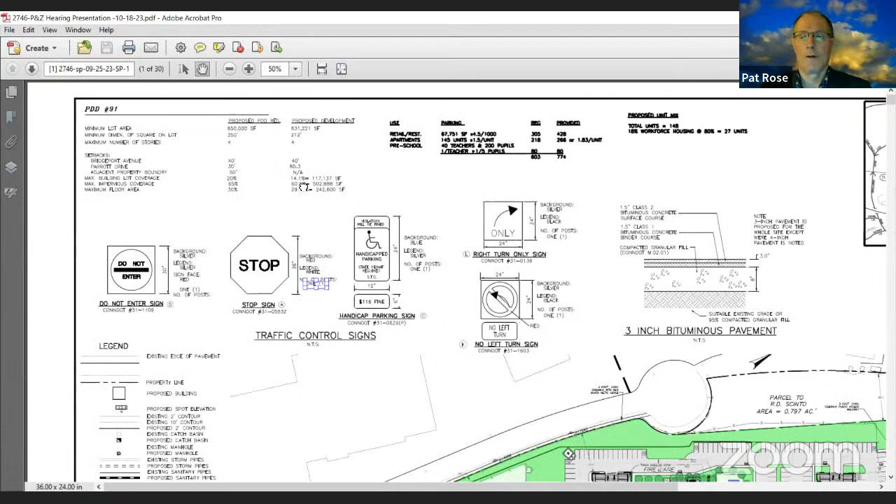So, in taking comments that were given at the initial public hearing, we've made several changes to the site plan. First of which, you can see that the pedestrian access has been retained and the vehicular access has been removed between Enterprise 3 and our site. So now we have parking that goes all the way across and closes that off. The other major change is that there is parking underneath the building, and there are 4 stories of apartments above that parking level.

So we still have the building broken up into 3 pieces. This side, which is A, has 41 parking spaces in it. The side that's B on the other side, which has parking, has 49 spaces. And in each one of these garage areas, there is a trash room adjacent to the elevator. So people would bring their garbage down, put it in the trash room, and then staff would bring it out to the dumpster locations in order for the trash to be picked up.

Fairly straightforward. What we've done as part of this with the building is we've dropped the lobby, and common spaces are still on the ground floor, so that this breaks the 2 buildings apart. You have access from this ground floor to the pool, to our amenity space in the back, where we have some grills, picnic tables, fire pit, and seating, and then it's a grassed area around. Mr. Rose, what did you say was still on the first floor? The lobby and what? The lobby and common spaces, which I'll show on the floor plan. Okay.

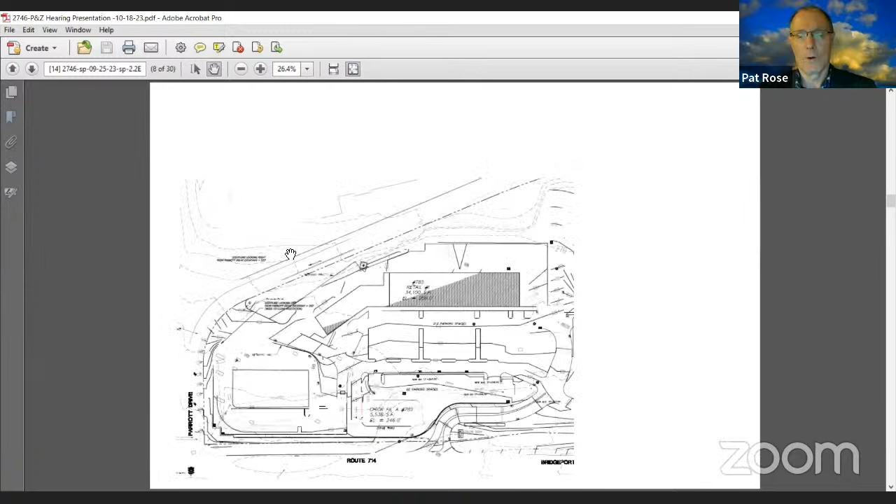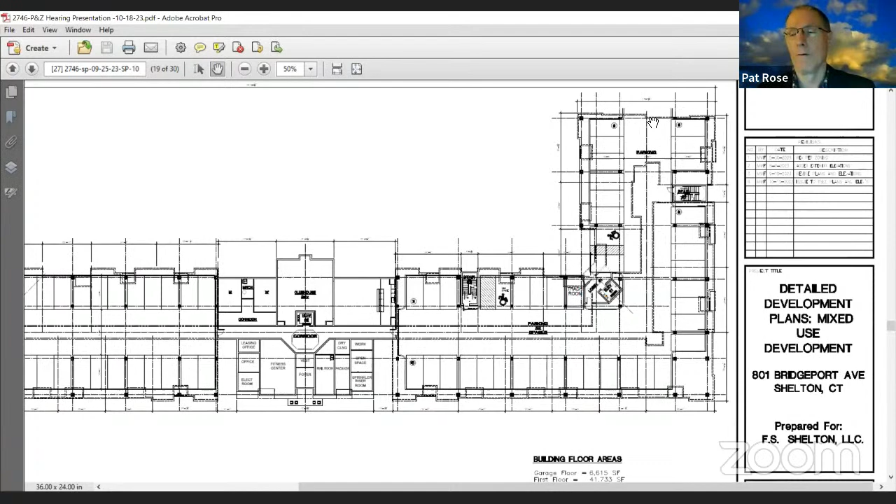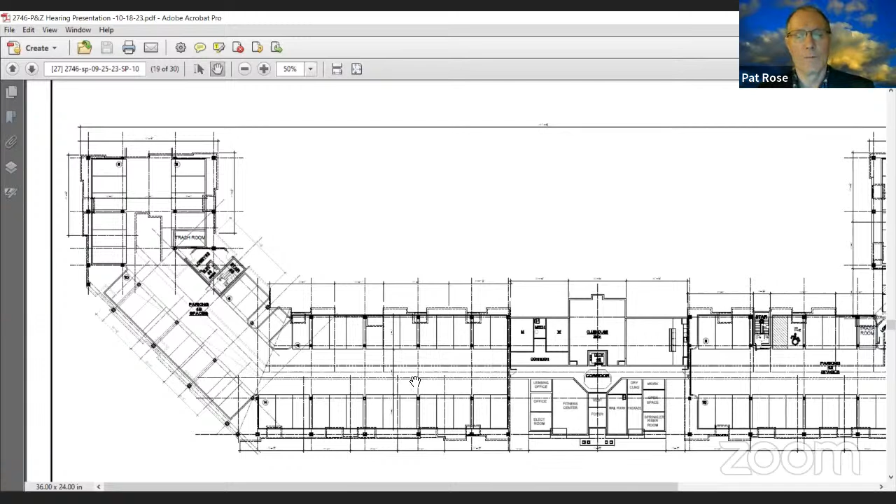We've got an L-shaped parking area here under building A, elevator here, stairway here, and your trash room. So when you enter, if you were to be parking outside, you could walk in, and on the left and right side of that common area is the street level, so to speak, parking spaces. Correct. Okay. All right. So you're entering both of these wings at the rear of the building, and they are dead ends, and there would be assigned parking in there, and you come back out. Again, we have elevator, stairway, and the trash room in this little knuckle here of this V-shaped section.

We have a unit count on this plan, which talks about 148 units, which I'll explain where those extra 3 come from. And 148 units, and I believe with the 18%, we come out to 27 affordable units. The breakdown of that 148 units, it would be 60 one-bedroom units, 17 one-bedroom plus office units, so that's really 77 one-bedrooms, and then 71 two-bedroom units. So it's almost 50-50. It's a 45-55 split.

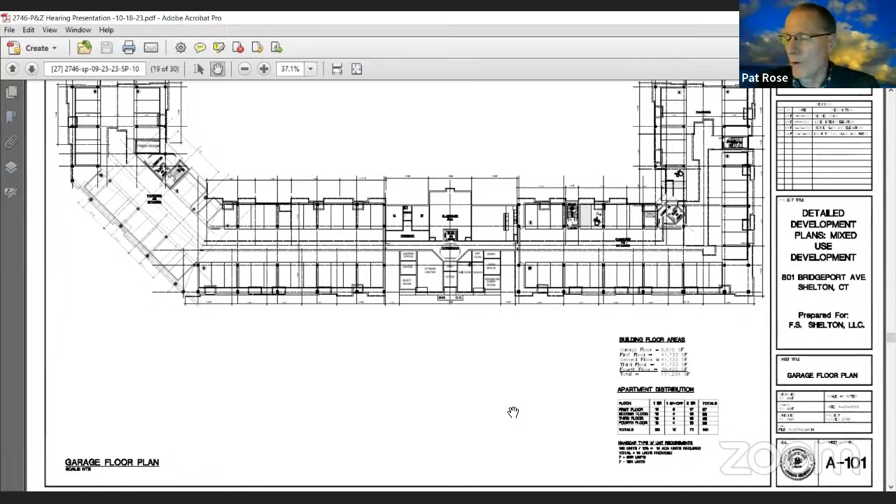And the unit sizes that we had talked about previously have not changed. The one bedrooms are from 700 square feet to 850, and the two bedrooms range from 950 to 1280 square feet. The typical floor plan. This is the first floor. Has 2-bedroom units interspersed along here, and then there are 1-bedroom units interspersed.

The only place that we lose a unit on this first floor, we end up with 37 units, is because this club area is 2 stories. And in this, because we've had this common space area on the first floor, we've had to add an elevator for that common space. So it is separate so that you can access that common space from either wing of the building without having to go into the garage. Same thing for here, 2-bedroom units, and then 1-bedroom units across the front.

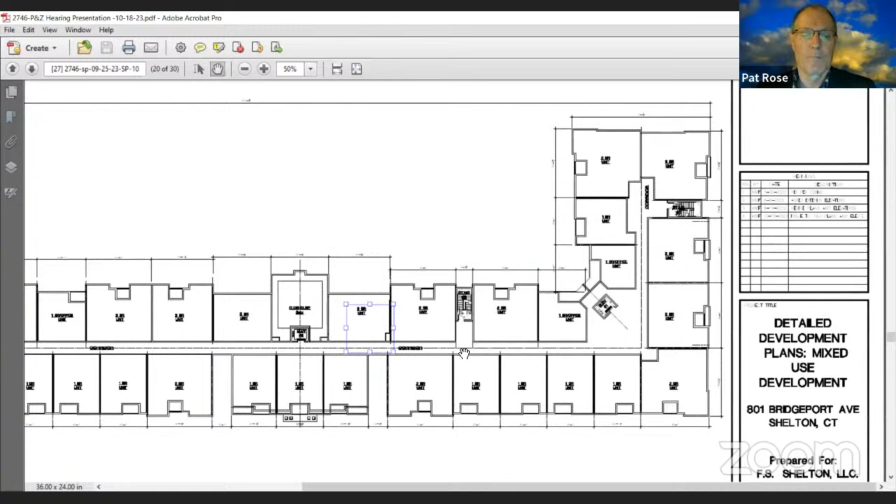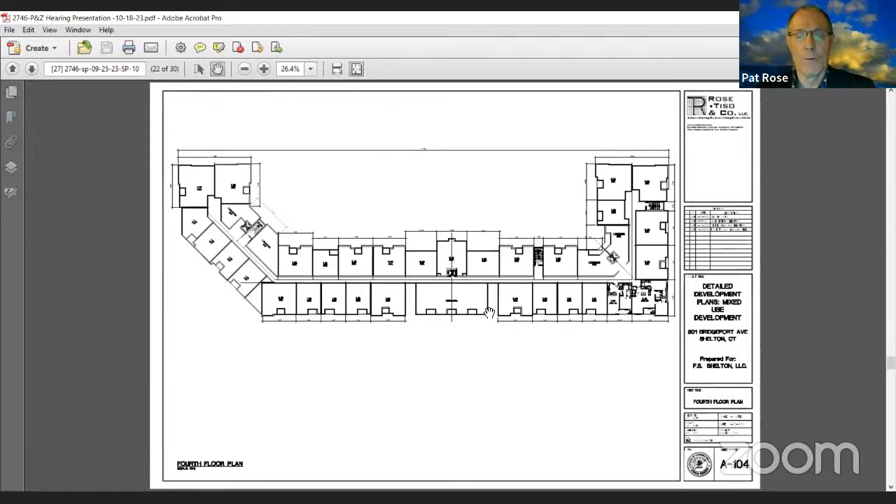The typical second and third floors are the same as the first, except there is a unit in the center where this elevator is. And then on the next floor, which is the fourth, we have removed any units off of the front of this and created a deck. Going to be a roof deck on this fourth floor, which is accessible by this corridor. And we did that and maintained 3 units on the fourth floor in the back so that we could have access from one side of the building to the other side without breaking the building.

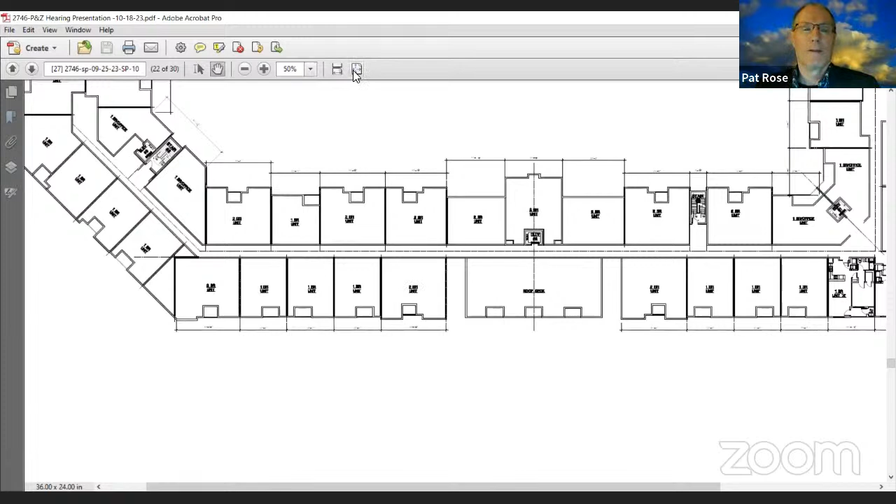The elevations are somewhat similar, but I believe that we posted the renderings. I don't know if everybody has seen them. I will use those because it's a lot easier to describe what's going on than flat elevations. So this first rendering shows a bird's eye view that shows the access drive coming up to the platform where the residential is, and you turn and the front entrance is here. This is a 4-story section right here. These are 5-story pieces on the other side. So there's a break in the building.

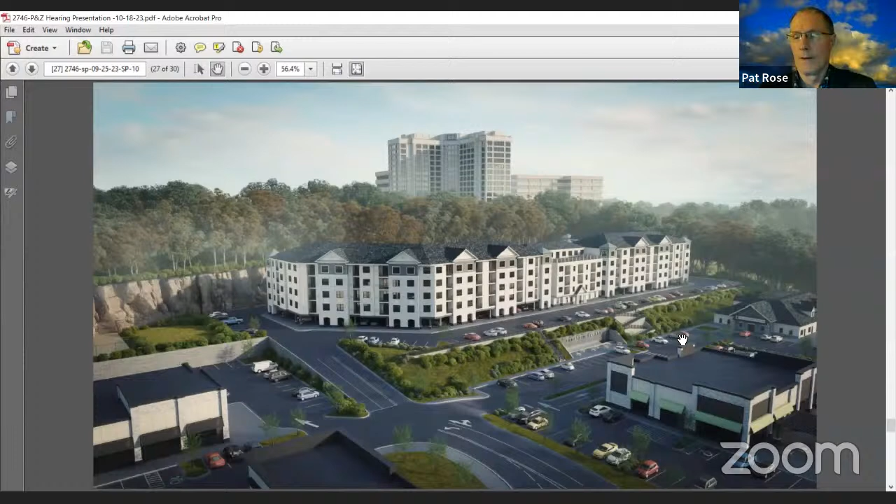We're continuing to do towers that are reinforcing the corners of the building and the gables that move along. So then you go all the way around the building and come back around this side. The dog park's over here. There's a grass area on the side of that. You can see where Panera is. This is where the fountain is at the bottom here, the lower level that squirts up, and the main fountain square here. And there's some seating outside of that. And the main retail building is over here. And Goddard School is over in this corner.

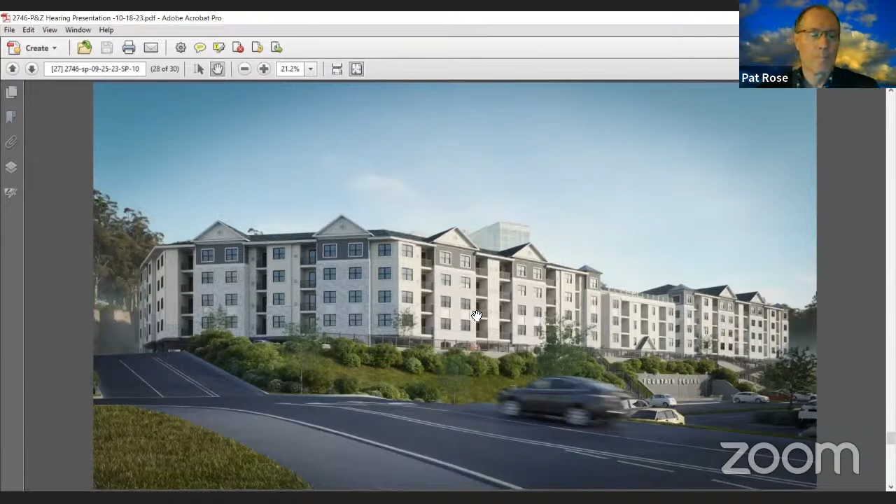So as we drive up that road, this is what we see. You can actually see the residential building and corporate park behind it. You see the 4-story with the roof deck here, and the other higher 5-story buildings. You can get a better view of the fountain down here, the fountain squirting up and some seating. Get a better view of the materials that we're using. What we've done is we've reinforced and brought these towers to the ground at the garage area, all brick, up to the top fourth floor where these are shakes, and then the gable above.

And again, we use brick on the lower levels, and then siding on the upper levels. Tried to use the same brick that we've used in the buildings that are on site. Use a light color siding to emulate the EIFS that's being used on site, and then a darker color for the shakes, which is used in the Panera building. So it's interspersed on the site. And then we're using black windows, same as the retail buildings, which all have black window frames. So we've incorporated the materials that are being used. And one other thing, at the bottom of these columns and towers, we are using the same black granite that's used on the lower piece of the retail building.

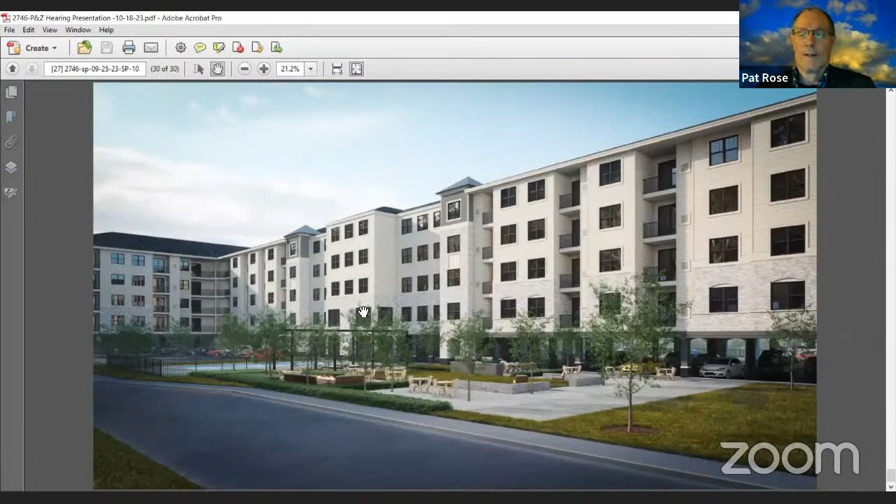A view of the rear courtyard, where you can see the common spaces in this location. Pool being here, seating areas, and then there's grill stations, and then there's a fire pit in this corner, and then grassed area on that side, interspersed in that courtyard. There's a nice space behind that.

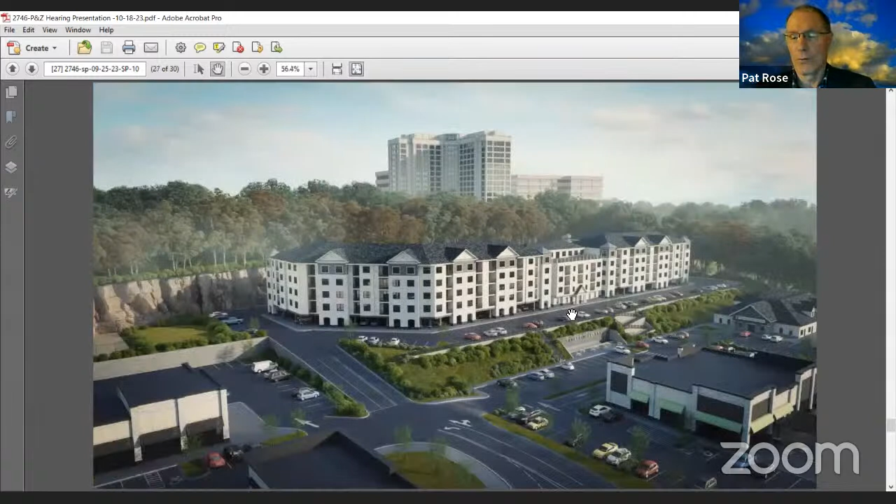That's it for the architecture. I invite Manny if he wants to go through any of the site drawings. I can stop sharing if you need me to, Manny. Yeah, that'd be great. This is Manny Silva from Rose Tiso Company. I'm the civil engineer on the project. I'm just going to pretty much go over some things that were changed during our last go-through.

One of the things, as Pat was detailing, is that we have put all the parking under the building. That's the main thing here. So you have your entrance, you're coming up from Bridgeport Avenue. You're going to circulate. There's 49 spaces under this wing here, and then 41 spaces here where you come in from the north wing here.

We also added a sidewalk, which instead of being a vehicle and pedestrian access, as Attorney Thomas stated, is now just a pedestrian access to the corporate towers. And that will continue to be here in this corner. We were also asked to extend the sidewalk along Parrott Drive and then add a new fence. Now this fence is going to be a black metal picket fence, similar to what we're using on the site.

So it'll be a decorative metal fence along this sidewalk here, and that will actually connect the Renaissance Tower area here and then these industrial areas to the west of us down the sidewalk on Parrott Drive and then into the property that way.

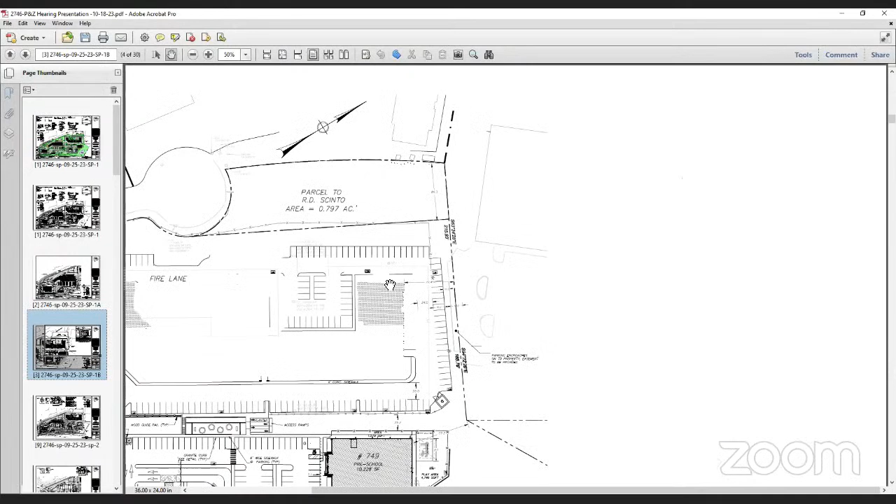Okay. So as in the rendering, there's a dog park here, and then there's going to be a grass area in this area here. I've also added a little more detail on the amenity space behind the apartment building. If you go to SP1B, I have an inset here where you can see we have some stone patios here and here, and a seat wall around a natural turf area with a fire pit area here, so people can sit around. It's going to be a gas fire pit. And then we have 2 areas here for picnics outside, and then 2 grills.

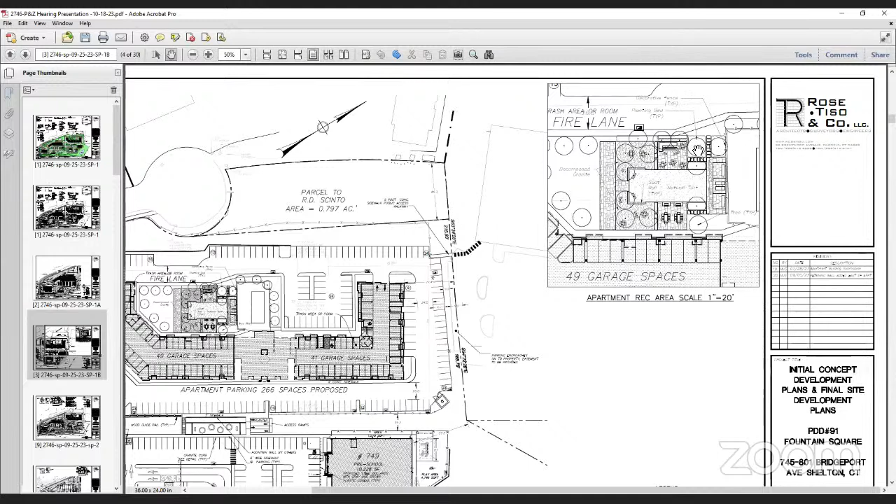It'll be landscaped. You could see that in the rendering. The renderer did a good job of showing what this space is going to be in 3 dimensions. I think that's most of the changes. Oh, and then we had this fountain, which now is going to be a pool at the bottom with upward jets, similar to what's at the entrance here. And then that back wall will say Fountain Square, and we'll have some tables and seating in front of that water feature.

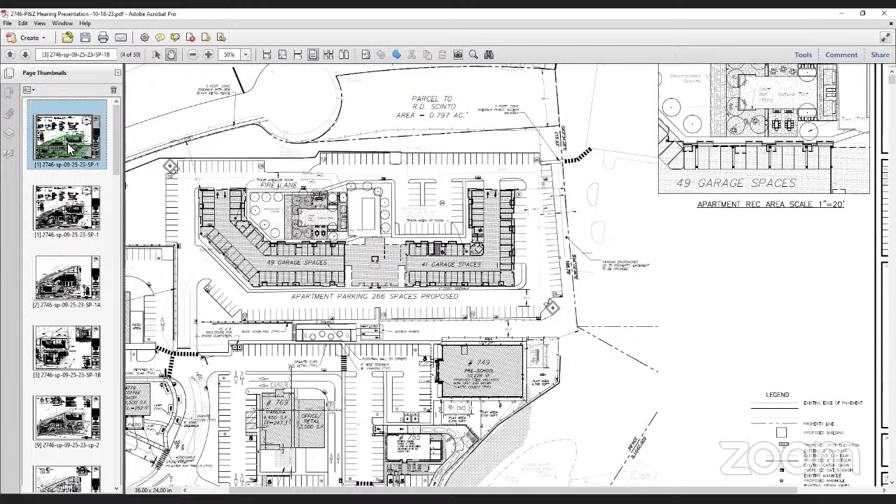And then as in the rendering, you saw that switchback stair here, and then that stair down here to connect the 2 plateaus, the residential plateau up top and the lower one below. So if there's any questions, I wouldn't mind answering them. Are there any questions from the commission? Commissioner Amato does. Sure.

The fence along Parrott Drive was at one point described as black chain link, and you're saying that it's going to be a picket fence, which sounds better to me. Correct. So there's currently a chain link fence. It's very run down. It's actually falling over in some sections up here on top of Parrott Drive.

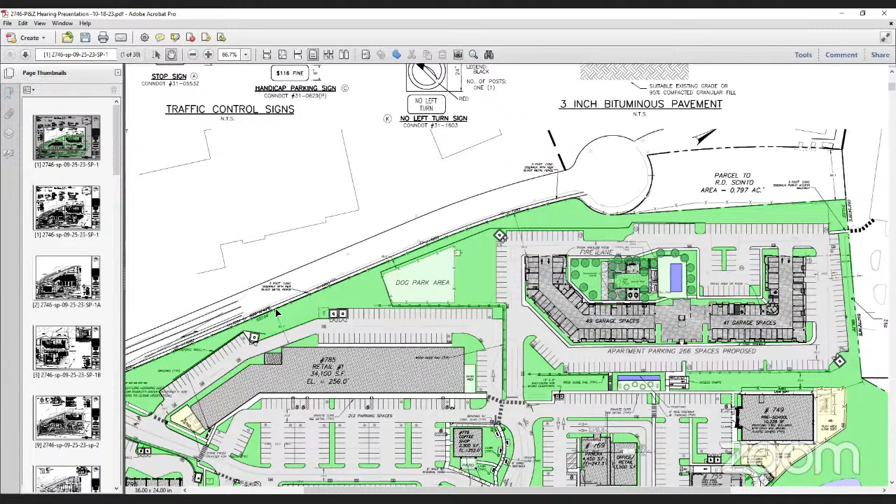And we'll replace that with, you can see that in the rendering too, a black metal fence that has black pickets. It's not going to be a solid privacy fence or anything like that. You can still see through it. Is that similar to the one that's along the driveway and on top of the fountain? Correct. We're going to use similar fencing throughout the whole project.

Any other commissioners have any questions? Around the dog park, you have a significant cut and graded area for the dog park area, which I think, if I'm reading your contours right, is substantially lower now than Parrott Drive. Correct. So on Parrott Drive, what are we doing for vehicular protection, on top or below, in that area where the drop off is so close to the road?

So this here will have fence on top, a sidewalk, and then there's the curbing from Parrott Drive. There's still, I'd say, I can measure it, but there's still a good amount of rock face here that's there today. Then from here below is a retaining wall. And then the park itself is fenced off. We have a fence on top of this grade here, which is going to be the metal picket fence.

I'm more concerned with the safety of the vehicles. I mean, if you think that you need an additional guardrail up here or something, but I suspect you do. That dog park area was not there when it was a UI facility, was it? That was created, correct. Before you had a significant green area, so even though there was a drop off, it wasn't a precipitous drop. But now you've created a precipitous drop of 25, 30 feet.

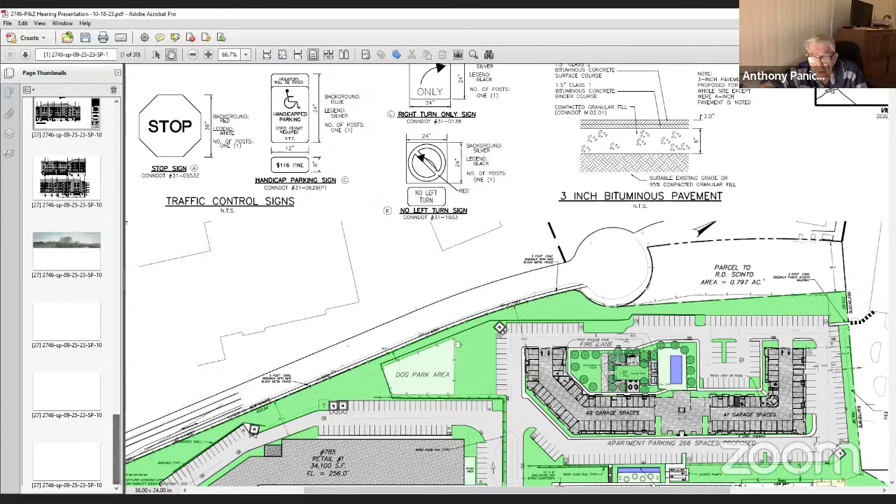Yeah, but I think there's enough offset in horizontal separation. As you can see in that rendering, there's going to be like 15, 20 feet of ledge up here on top where there'd be a fence on the other side of this. And then there's a sidewalk and then there's the road.

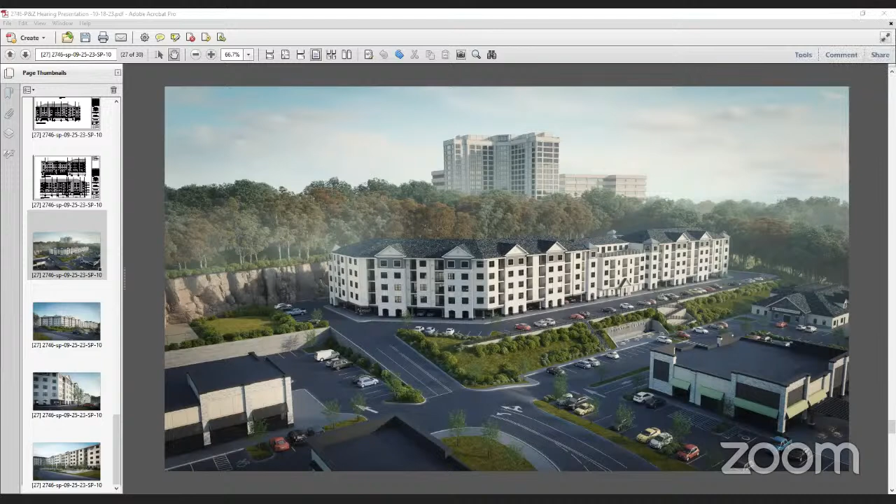I'm just concerned about the proximity of the face of the rock cut to the travelway of Parrott Drive. If a vehicle, for whatever reason, loses control and goes through that little fence, what's to stop it from going over the edge? Right. If that's a concern, we can definitely put a guardrail at the base of the fence outside of it. Somewhere, somehow, at least in that particular area. I don't know about the rest of it because it's very difficult. You've represented that the contours are not the true contours of what's there now, so it's hard to come up with any problem.

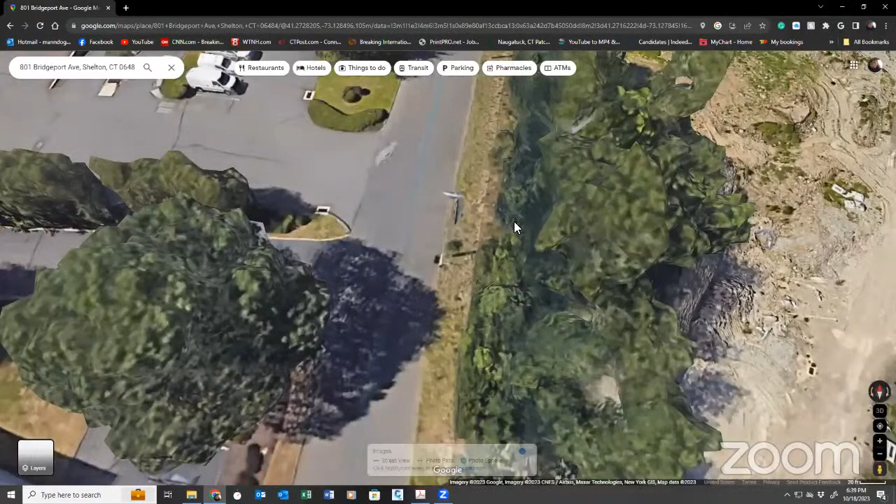Right. So you can see here from the aerial, this is the area that you're speaking of. Right now this is the existing fence with the barbed wire up on top. We're going to replace that with a metal fence, and then there's going to be a sidewalk here. And basically what you see in this picture, just on the other side of this brush is where that drop off happens. So they would have to go over this curb, over the sidewalk, through a fence, and these trees are going to be up here. And then that's when they would fall off the edge.

But if you'd like, as you can see a fence here, this will be replaced by a decorative metal fence. We can have a galvanized guardrail or a wood guardrail here at the base of it, if need be. Yeah, this is Attorney Tom, that's something that would be discussed with the traffic authority. This is a town road. So if the traffic authority and the city engineer feel it's necessary. It's been that way with a rickety old fence for a number of years, and there was still a drop off.

It didn't have that precipitous drop off before. It had a pretty good drop off. If someone went through that fence, they were going to go a short distance, maybe a little longer distance, and drop off. But whatever the traffic authority and the city engineer wants, we'll accommodate them.

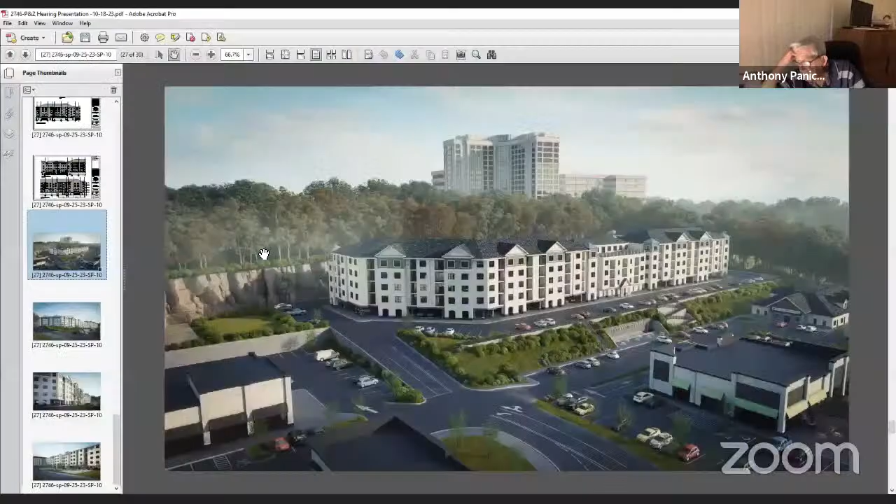Okay, any other questions from the commission or Mr. Panico? Yeah, I've got a couple. Go right ahead. Could Pat address the building heights?

Because the building is pushing height, 70 feet now, it looks like. We are at 68 feet to the very tippity top of the peaked roof. Right. At the UI building, it's 56 feet. Right, but our zoning always recognizes height to the highest feature. So we're dealing with 68 feet on the two wings, correct, 68 feet to the peak and the ridge. 61 feet or so on the middle part.

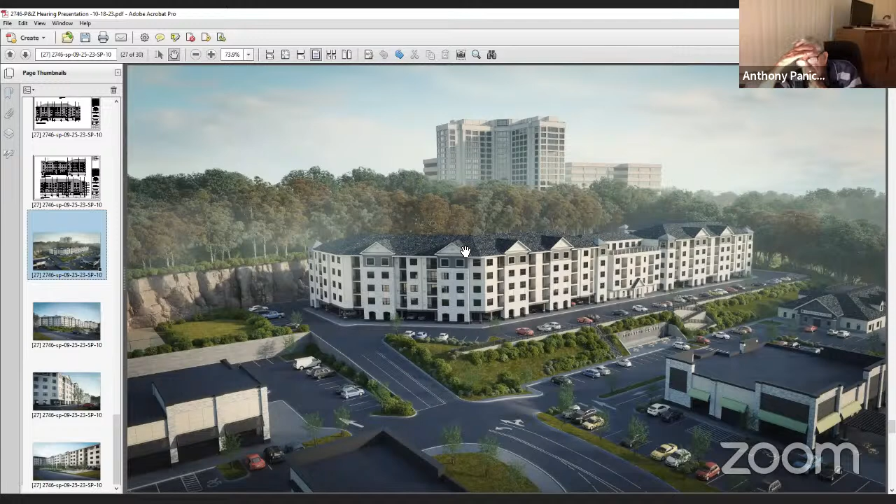If you did an average of those two, the middle between the 56 and the 68, you're at 62. Okay. Okay. And my other concern is the one I expressed early on in the whole public hearing process, is that you've got a building that's 500 feet long. And I don't think the modifications have taken that edge off of it. But

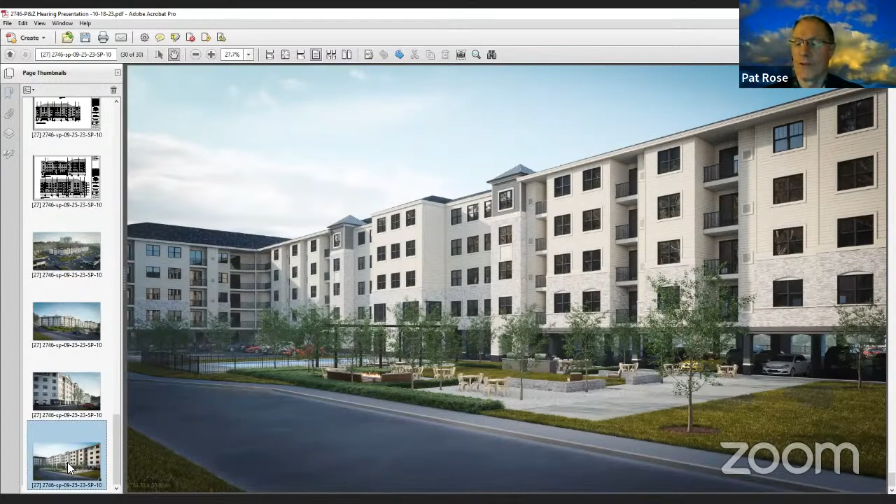Well, I believe that there certainly is a distinct drop, especially in that front elevation between the 4-story and 5-story building. You can't see the rear portion of it from anywhere unless you're in a helicopter. Well, I think you have the rear elevation, didn't you? Correct. The rear elevation you'll see, and the reason I've kept those 3 apartments up there is to be able to connect from one side to the other on that 4th floor.

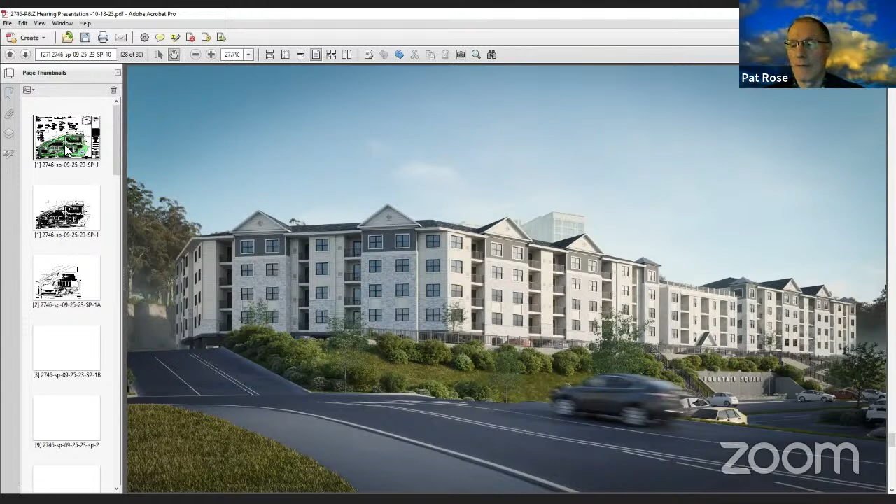And then my other question architecturally was, if I understood you right, you're going to collect the rubbish at the garage level and then move the rubbish over to the dumpsters? That's correct. Why not just pick up the rubbish at the garage level, so you don't need to have this outside rubbish? It is a possibility. We've got to go over that with the local carting people to make sure that we've got the height to do that, because that has some constraints inside the building. Mm-hmm.

Dominic, I didn't take the time to go look at the existing statement of uses. Are we okay on the height, or does that have to be modified? I would have to take a look at it. I don't have it. If you give me a minute, I can access it. That's all right. Just as long as you're aware of it. Yeah, we could certainly adjust it accordingly.

And also with respect to the height, I know it's big, but it has a view of a lot of stuff that stretches above it, being the Renaissance and the corporate towers. As you're looking up, it does take away from it because you're looking at buildings that go above it. Even from inside, but even from down at Bridgeport Avenue. That's different. But, yeah, I'm just saying.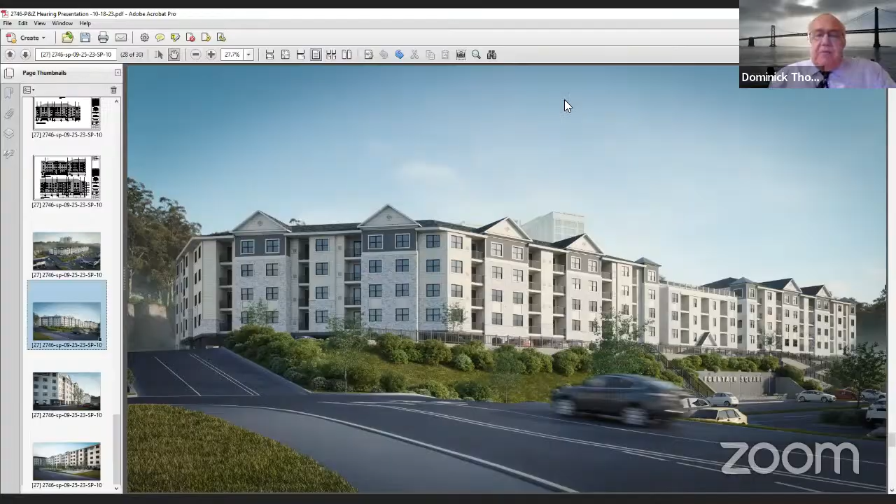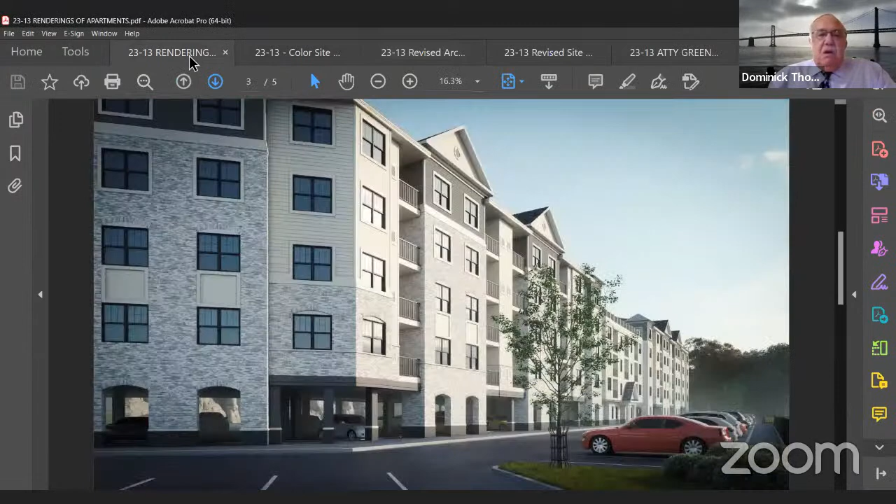It's different. If this were approved, whatever the name of this complex is going to be, are they going to be looking to identify themselves on the fountain? I'm sorry, you mean on the fountain down below? Yeah. Yes, as a matter of fact, if I can give you even a better, Pat, or Manny, stop screen sharing and let me pull something up. So here's a cropped version of the fountain. Is this what you're talking about, Tony? Yes. Are the apartments going to be called Fountain Square Apartments? I would assume so, but Dave Gunier is there. He may be able to answer it. I would assume they would be called Fountain Square Apartments.

Okay, my concern is I don't think it would be desirable to have any kind of identification of that sort on the fountain. The fountain is the fountain. It's the fountain for the whole complex. Right. It shouldn't be a basis for signage other than Fountain Square, of course. Oh, okay, we thought this looked nice. Well, it does look nice. I'm just saying, it shouldn't get messed up with. You shouldn't have another apartment name underneath that. Exactly. Oh, no, I'm sorry, I misunderstood you. No, the apartments are Fountain Square Apartments.

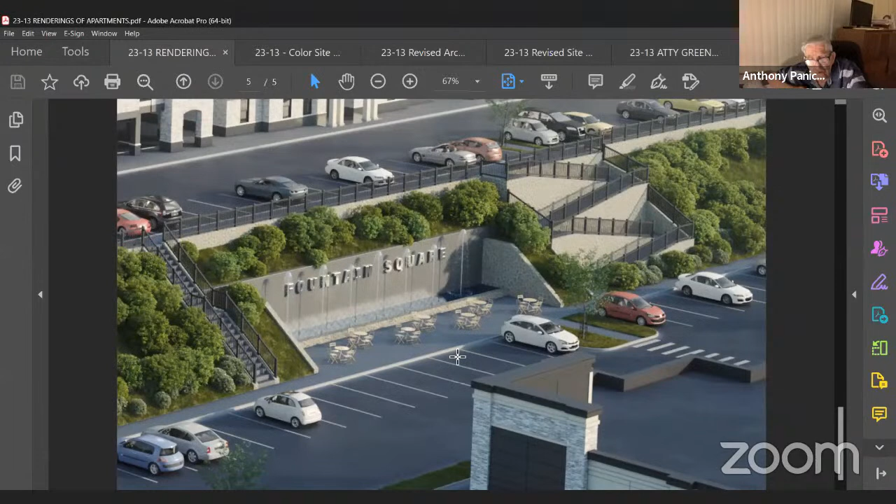I'm sure there'll be something of the apartments at Fountain Square, some sort of a small sign as you're entering, you know what I mean? Other than that, we haven't really gotten that far yet, but we're not gonna call it the Dominic Apartments. Okay. I just don't want to see any kind of advertising or identification creeping into the fountain structure. No, we're not gonna do that. We're just gonna leave it at Fountain Square. And you could see obviously here the water feature that we put back in to accommodate that, and also the switchback, you get a little better look at that.

Okay, Mr. Gunia is here, so he can identify himself for the record and make any comments. Hi, David Gunya, Highview Commercial, here at Fountain Square. Just to underscore Dominic's statement earlier, there will not be apartments named on the Fountain Square back wall in front of the fountains. We will have a small monument sign as you approach the apartment community somewhere. It'll be much smaller in size. And I believe the name Fountain Square Apartments or some version of that will be used here. Okay, that's it. Thank you, Mr. Gunia. I have one question. Sure.

Overall, since the conception of putting apartments in lieu of a hotel and an office building, has the apartments' footprint ever changed, or has it been the same since conception? The footprint as we have shown it hasn't changed, no. It just got higher, right? We raised it up in order to put parking underneath the building, correct? So it has the same number of levels of residential. Yes, it has four levels of residential above the parking. All right, and/or the ground.

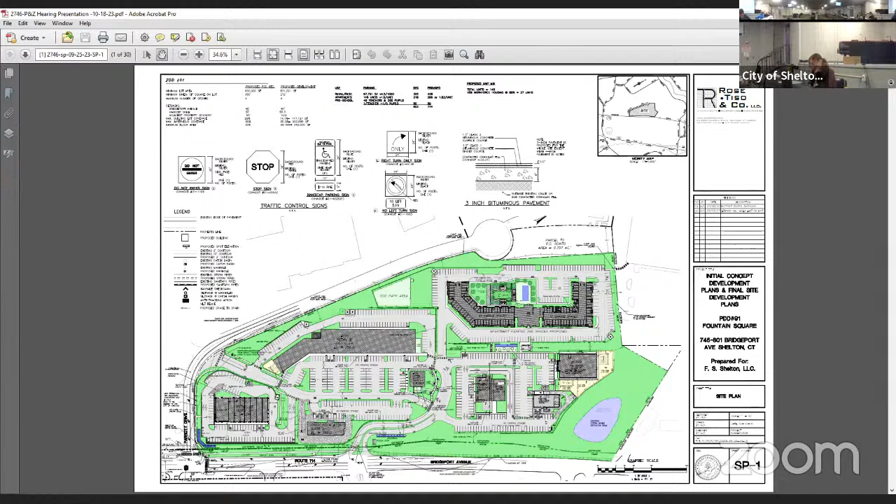All right. I think what she's talking about, this is Manny Silva from Rose Tiso. She's speaking, Dominic, about this sidewalk from the main entrance north towards the diner. The requirement was at the time, after some discussion in the original approval, that the clients had to prepare it. The then developers of Fountain Square had to prepare it for the installation of a sidewalk.

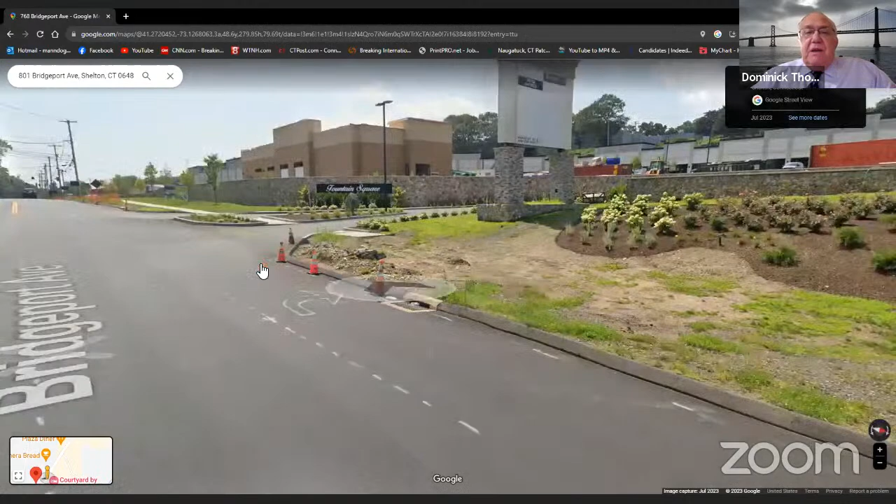In other words, it had to be accommodated in all the road stuff and everything, so that there could be a sidewalk down to there if and when, as the plan was, there was to be a sidewalk across Woodside. So it is prepared, as you can see, it's leveled, it's grass. The state didn't require widening into it. And the whole point was, is there ever going to be a sidewalk at Woodside Plaza? And if there was a sidewalk at Woodside Plaza, would there be a sidewalk at what was then the Sears Hardware, now the CVS and Chipotle?

And then a sidewalk in front of, which is apparently leveled, to have a sidewalk also in front of the Hampton Inn, which would then connect it to Commerce Drive, is it, at the end. And then that would connect up to the sidewalk that goes up Commerce Drive. So your commission wanted to ensure that at the very least, that was pre-prepped for it, and it was a requirement of the developer. So if in fact all those other sidewalks go in, then the developer is required to put that sidewalk in.

One of the comments that was made at that time was they didn't want the sidewalk to go down there and end, because if people then walk down it, they would feel inclined to try to cross Bridgeport Avenue, not at a crosswalk. At the very least, up here with the new light at Parrot Drive, you have the ability to get across the road. Yeah, I don't want this to turn into a dog chasing its tail and one property owner telling the other property owner, well, I'm not putting in my sidewalk until you put your sidewalk in.

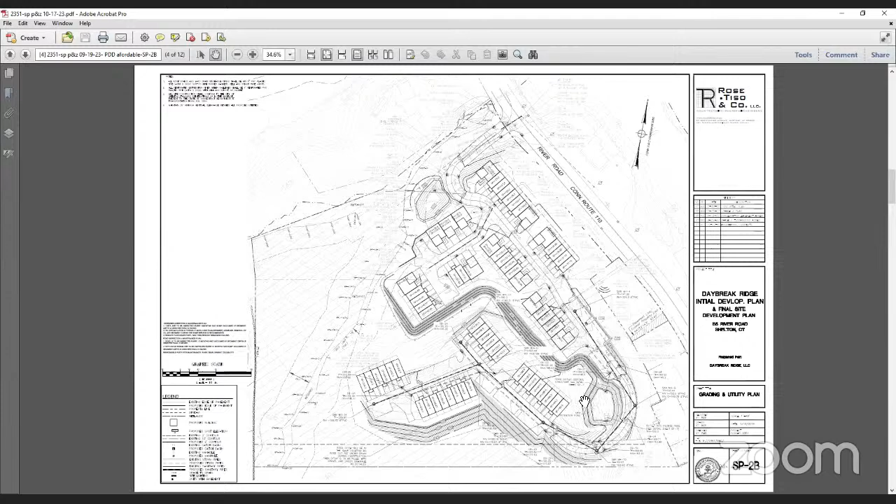The next thing was he asked that we have an independent geotechnical review of the rock face prior to a building permit, and I said we'd comply. There was another question about how the stormwater management plan ties into the existing. As I showed you last time, the pond here in phase 2 has been oversized, so that the amount of water coming into phase 1 is less than 2 CFS, and that's at the 100-year storm. So the effect of phase 2 on the drainage system in phase 1 is minimal.

That discharge actually ranges between 1.4 CFS to 2 CFS, which won't have a negative impact on the intent or the controls of the phase 1 design. In fact, the overall reduction is in the report. We have an overall reduction for the whole development from the existing condition, which is a wooded area going down into River Road.

There was a question by the commission and the town engineer to add some guardrails to the curved area here. So we've added a guardrail to the inside here where the area drops down. And then there's a guardrail here to the outside of the curve where the grade is lower on the outside of the curve here, and it's lower on the inside of the curve here.

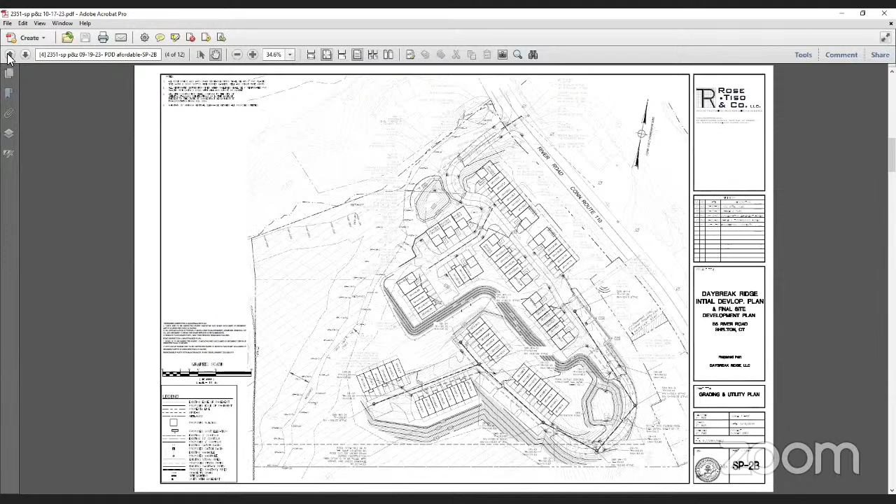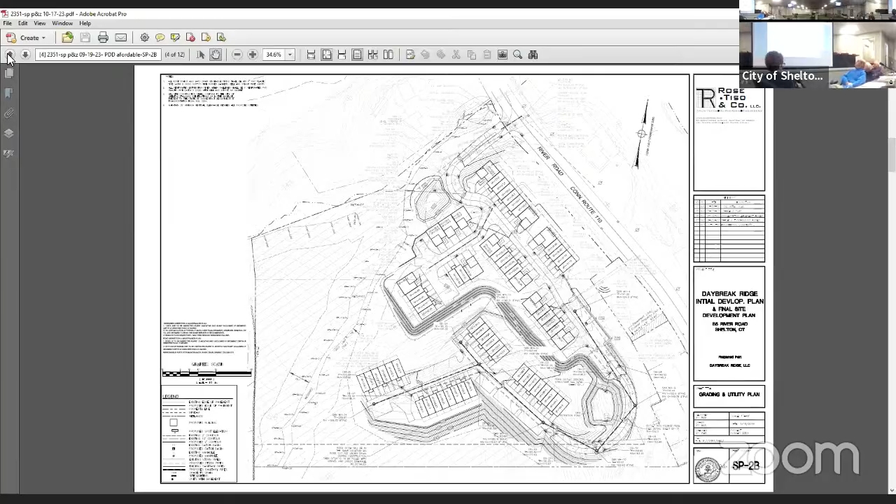Could you redo that? Silva, could you please use your cursor again? I think it froze on the screen, so we're not sure where you were indicating as far as the guardrails are concerned. Yeah. Okay, sorry, I'm back. I don't know if it was me or whatever, but I'm back. Yeah, the cursor froze, so if you could go over the guardrails again.

Yep. So we added a guardrail to the outside of the curve here where the grade on the outside of the curve is lower. As you work your way up, this is actually at grade. Then the inside of the curve is where the grade is lower, so we'll have a guardrail there. And what's always been on the plans is that we'll have a 4-foot high black vinyl coated chain link fence at the top of the grade difference between phase 2 and 1 here.

Number 5. Go ahead, I'm sorry. How many degrees does that curve go? Is it 180? Yeah, almost. It's just shy of 180. So it'll come up and almost does a turnaround. It's not exactly 180 degrees, but it's pretty close, probably 175, 170. Okay. It's kind of like a switchback, but it's got a very large radius, so it's not going to be an issue for anybody driving at the speeds they're anticipated to drive here.

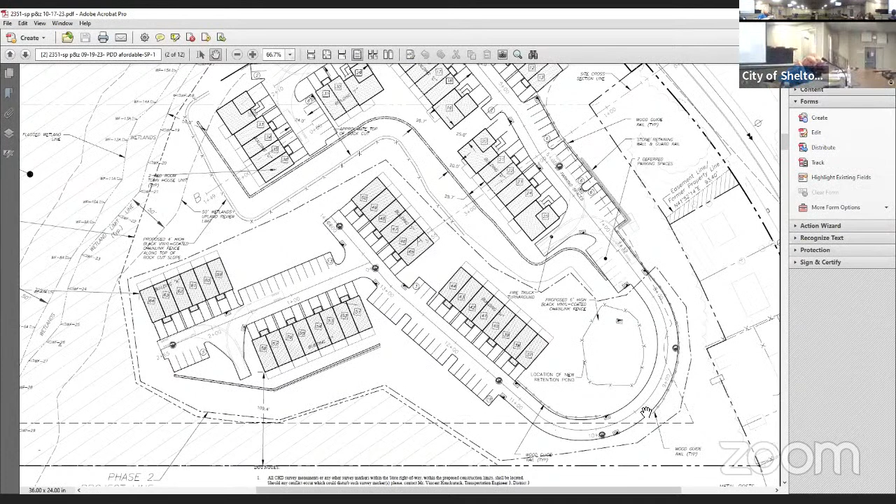Well, what is the grade of that? Also pointing out the fire marshal has said it's okay for the fire trucks, right. Good. Mr. Silva, one. Yep. What is the drop where you're gonna put the fence now from section 1 to section 2? What is the drop down from there?

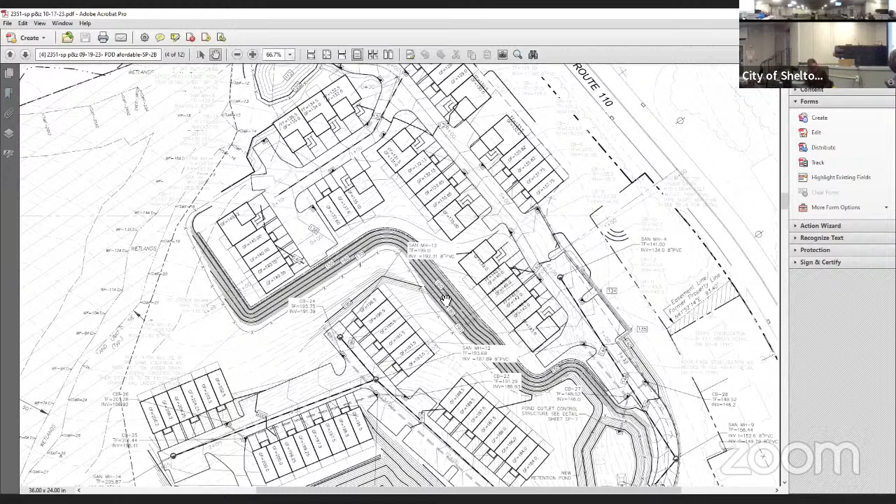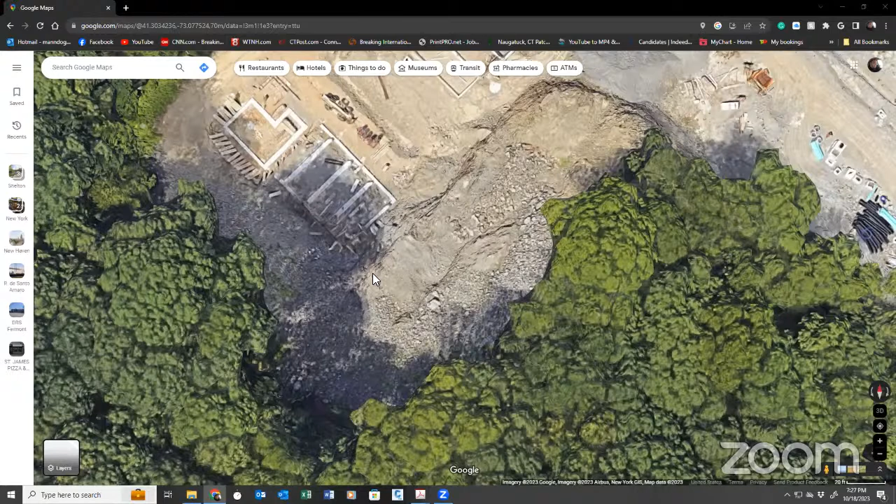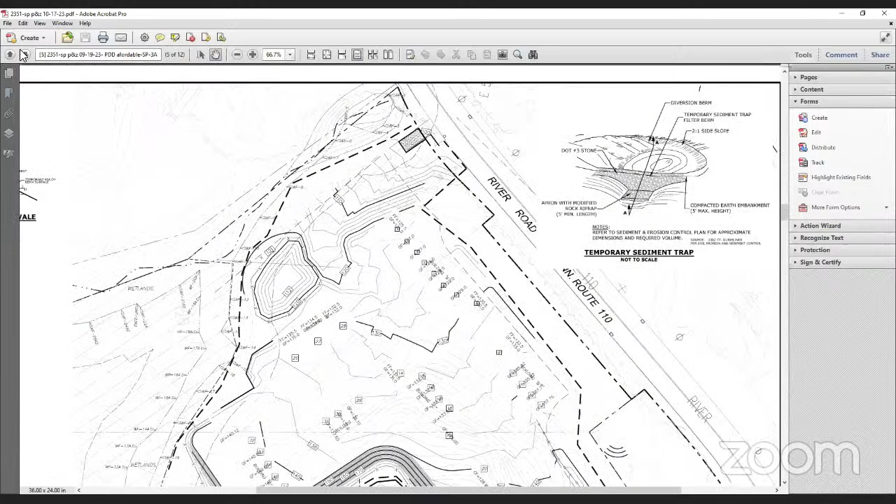I explained this in the engineering comments also: even though I'm showing a conservative 1-to-1 slope of the rock here, the intent is to follow the detail that's on SPZC, which is going to have the stepped rock cut. To show that in contours would be an exercise in futility. So basically the contractor has to do what he's been doing out there, create a bench rock cut like this. As you could see in that aerial photo, he is achieving that by creating 1 step, 2 step, and then he has the overburden battered back at the top.

So the new parcel, the new section 2. Yep, I'll call it section 2. Now, you're also gonna have a step effect behind those condominiums also. That's correct. The same detail applies for all of it. What is that height? Another 40 feet, 50 feet up to the top? Hold on, let me just go back to that. So that's on a 210. It's another 40 feet. Okay. So basically, top to bottom, it's 90 feet.

Right. The site has a peak here. Yeah, exactly. I'm just going to say yes, because the area we are developing is that height. The site overall has a much bigger drop, but we're not developing the rest of the site. Okay.

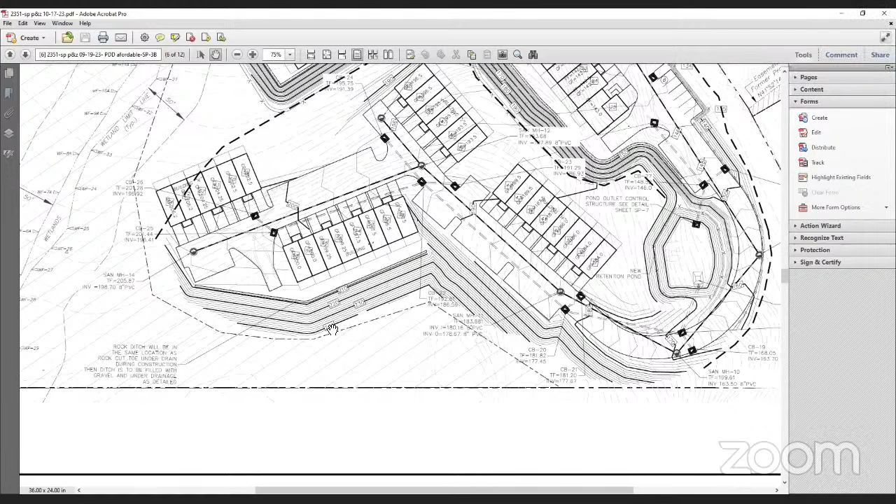So the next thing was the sewer manholes to be relocated in the middle of the roadway. I know this commission really doesn't care about sewer manholes, but here they are in the middle. And that shows up on all the plans.

The fire marshal and the town engineer wanted a truck turnaround here. We didn't have this turnaround here. We thought that the distance of this last little road was enough that you could do the turnaround in this intersection, but we've added one here at the end, just like on the other sections of phase one.

Added some phase two hydrants. Well, the locations, again, we'll coordinate with the fire marshal on the exact locations, but we showed where we believe they should be. But then I'm sure he'll have some comment on that.

The town engineer is talking about also adding some water mains with blow-offs and valves, but that's something that we'll work with Aquarion on, and we show a note on our plan saying that we'll coordinate with Aquarion on adding blow-offs and valves accordingly with the meter locations. Mr. Silva, what's the purpose of those valves? The blow-off valves.

So if you have a water main that just terminates at a dead end, you're going to need a blow-off valve, which is a valve that lets out air but not water. And that's just so that you don't get an airlock on the end of the water main, and then basically someone won't be able to get water, or when they do, they get this blast of air, and then it causes a water hammer and it blows their fixtures off.

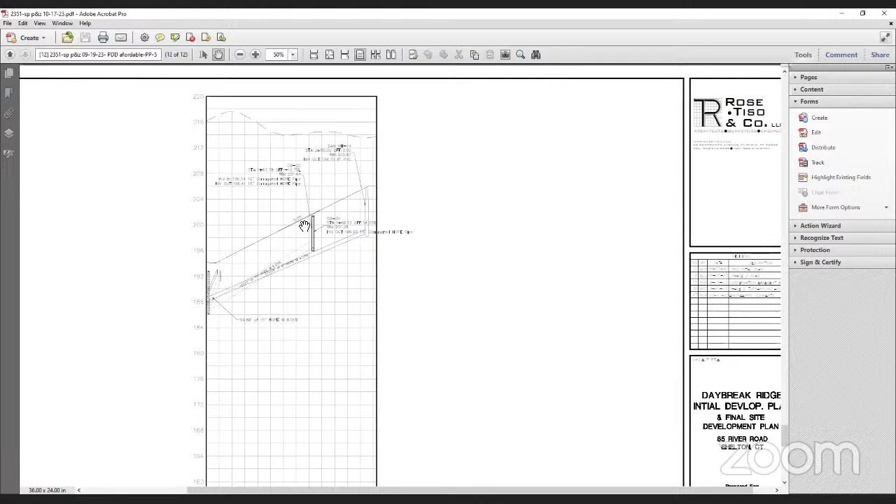Provide grades on all side roads. So he wanted me to call out the road grades on the profiles, which I have here. You can see 5% is that last little road, and then the main road coming up in that curve is 10%, and then as you hit the units, it becomes 5%. Like I said last time.

Mr. Silva, I think you need to go back to number 10. I think you skipped that one. Number 10, the 10% slope. Yeah, additional room behind building J, providing for greater rock trap size.

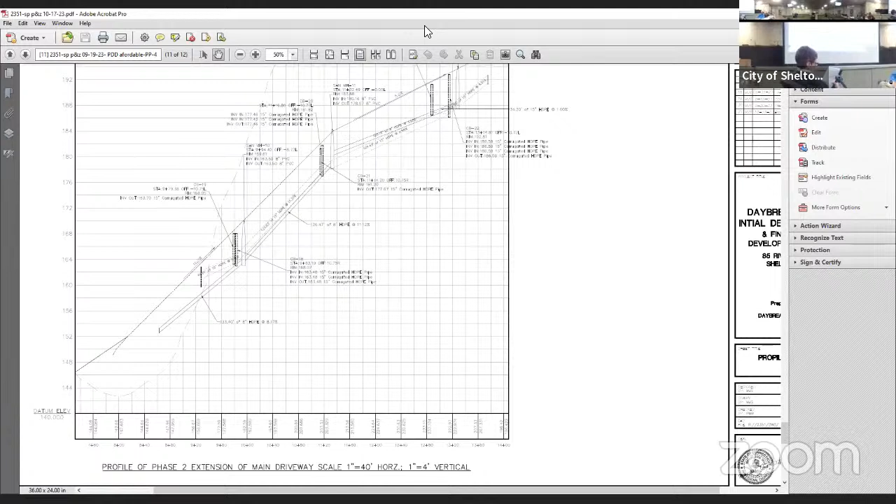Oh, right. So that's what I said right in the beginning. The town engineer asked me to pull the base of the rock cut here from building J back because it was closer. It was right up against the decks at one point, and then we pulled it back to the 25 feet that we had on the other units like this. So we did a similar pullback.

Number 13, catch fencing for rock fall protection. And again, we don't have catch fencing. We decided to do a 2-foot earth berm at the rock fall area. And how we're doing that is we're making that like an earth berm with some boulders. It's kind of decorative, and you don't have just a physical fence here.

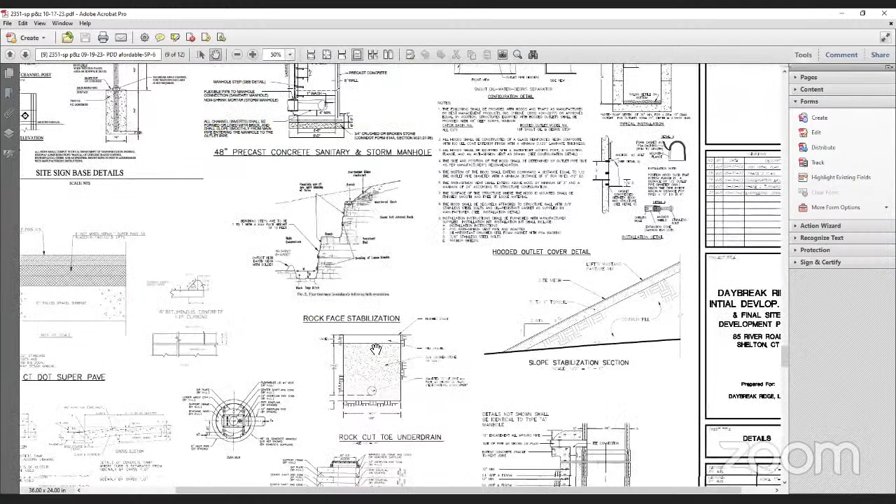But that's to stop any kind of rock that's coming off of this face from rolling down outside of this rock cut ditch right here, which is gravel with perforated pipe to collect any water that's coming off of it. Is the nature of that rock wall such that you know pretty well whether or not it could split at all, fracture, and pieces come off?

Again, like I said in the previous application, this is a very igneous rock. It's not sedimentary like the rock along the Route 8 corridor. The rock down the Housatonic River Valley is very old bedrock, hard volcanic. It's basically volcanic magma that's been cooled. So it doesn't fall or crumble. It doesn't fall apart like what you see on Route 8. So I don't anticipate the rock falling apart like you see

around Bridgeport Avenue. In fact, there's a rock cut similar to this or even higher that's existed for probably 100 years now, just adjacent to here on River Road itself. Yeah, it sort of has like a brick or stone look. It looks like this. This is it, right?

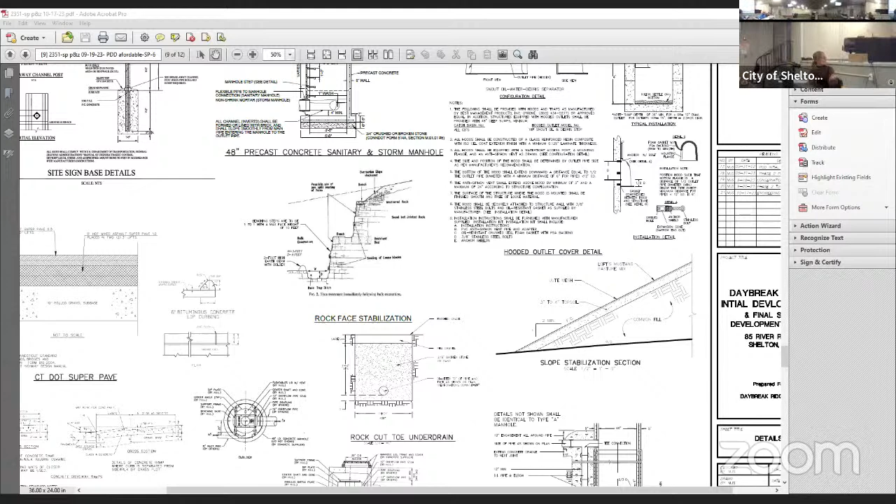Hold on. I gotta remember to change it. It looks like this, and this has been here forever. Oh, so that's what it looks like. It's like a gray, dark gray rock. That's what'll end up happening with ours as it weathers.

And you won't get that like on Route 8, which is like a lighter brown sedimentary rock, which kind of breaks apart. Yeah, it's like all sheets of it come. Correct. Right. As you can see here, it stands up very straight, but he's going to batter this back. This is an early picture. As you can see here, how it kind of leans, it batters back and it lays back. That's what the rest of this is going to be.

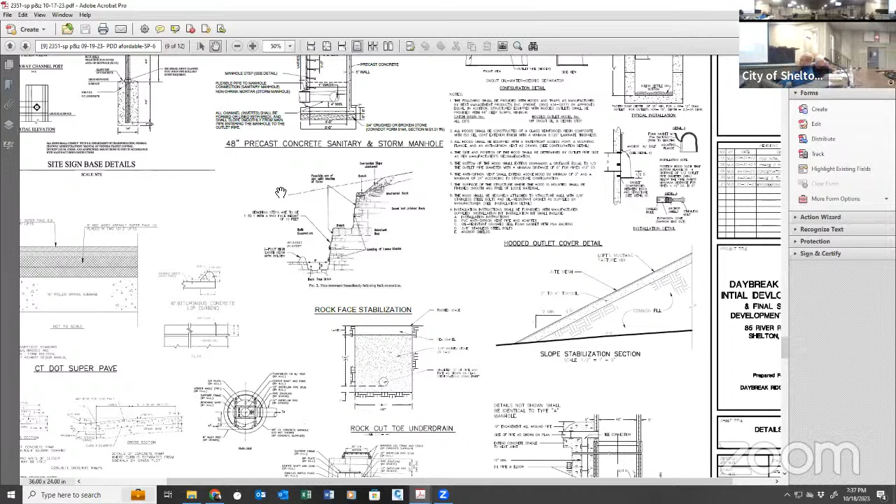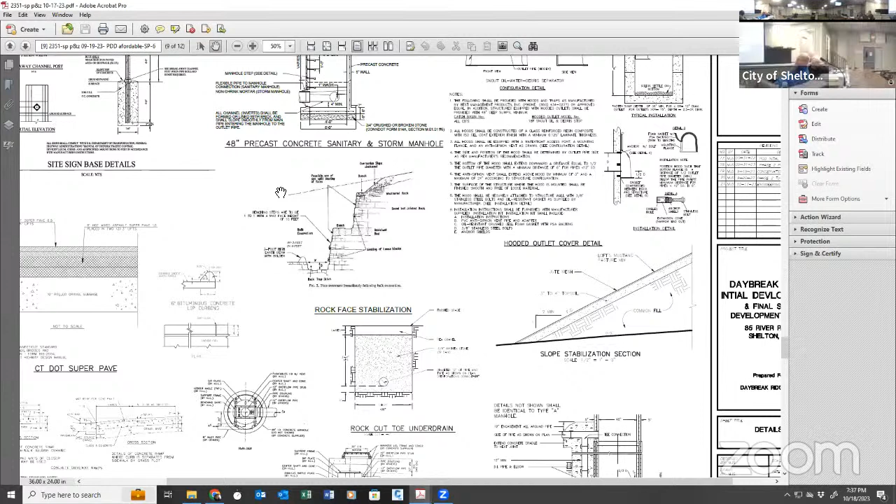Yep. Let me just switch. Commissioner Romano has a question. Sure. Report to be done before what phase, and what happens if that report is not favorable? Can you just repeat that? I think you're kind of far from the mic. I think you'd mentioned that the city engineer had required a geotechnical report to be done. Right. That would happen after your approval and before any building permit would be issued. So we couldn't do any work without that first. So if that turns out badly for you? Then we either have to do mitigation measures like pinning the rock or stabilizing it, or we can't build the buildings at all, one or the other.

And then the last three things: he asked for a fence on top of the rock cut from phase 1 to 2, and that's what we provided. I showed that already. Number 15 is sewer manholes maintain sufficient depth and vertical separation from water mains, and I said we will comply because we have to coordinate with Aquarion to add the water mains anyway, so that's when we'll do that. The sanitary manholes must be maintained at sufficient depth. Okay, 16 is basically the same as 15.

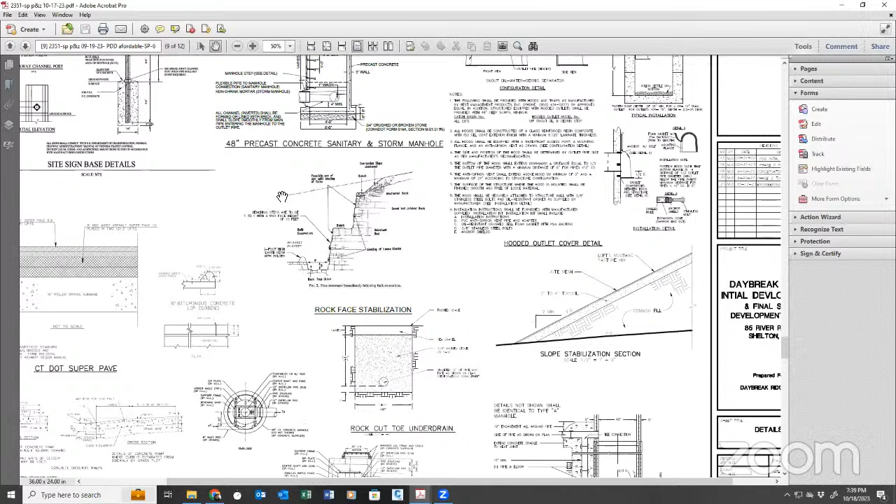He asked about the garbage pickup and why there are no dumpsters shown throughout the site. The reasoning is that the way garbage collection is going to work here is they're going to have bins, just like you'd have in the residential neighborhoods in Shelton, for each individual unit, and they're going to put it out on their curb. The garbage truck is going to come on site and pick up the individual bins. There's no centralized dumpster. And I think that's it for me.

Do any commissioners have any questions for Mr. Silva? Mr. Panico, how about you? I was curious: is it a municipal rubbish pickup or private rubbish pickup? It'll be private. There's no city pickup here. It would be private, like Colonial or somebody like that would come pick it up. They would provide the rubber bins for each unit, and then they would come pick it up with their truck. Okay.

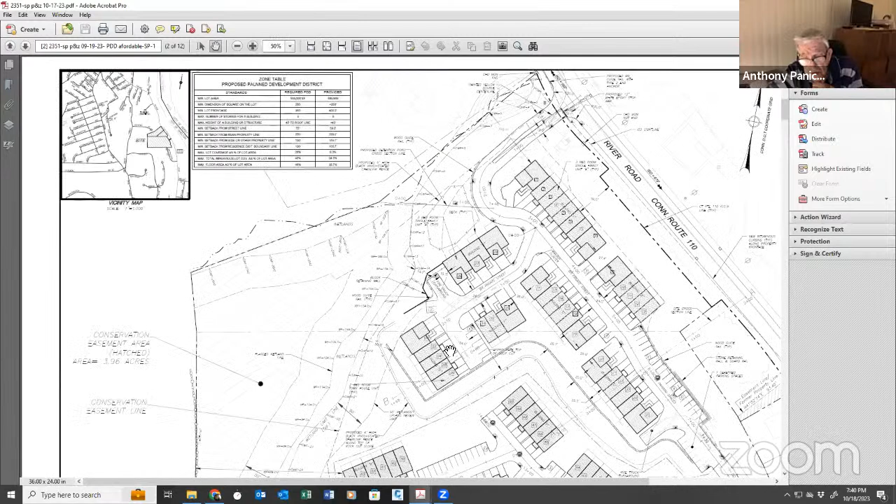Could you just review one more time the fencing that was in question earlier in your presentation and how it relates to the fencing around the detention area? Is there a gap or are they connected? They're going to be connected, because as you see, the retention pond is basically a depression; we're going to cut back this rock and make a depression here. So at the drop between phase 1 and 2, there's going to be a fence right along here as we come up along this plateau, and then it's going to go around the retention pond, because the retention pond is obviously a drop down into the water if there is water in there. And then there'll be just a gate here to access for maintenance, because this is level with the driveway here.

Will there be need for maintenance between the fence and the top of the slope? No. The only maintenance that's going to be required is this plunge pool that comes out here. There's a little outfall here, and you might need to take some sand out or whatever. Really, no one sands anymore, so that's not going to be a problem. Well, what is the ground treatment between the fence and the cut? Is it soil? Is it rock? In the retention pond? No, the balance of the fence, the protective fence along the top of that 50-foot cut.

So the fence is going to be basically right on top where the overburden is, which is going to be like a gravel. So there's going to be the fence, kind of like a riprap gravel, that's the overburden, and then that's going to be the rock. So there'd be no vegetation at all up there? Not between the fence and the rock cut, no. Only above, from the fence to the upper units. Right. Is there any vegetation between the fence and the bottom of the cut? Yeah, there is. Phase one is required to have some arborvitaes planted at the base.

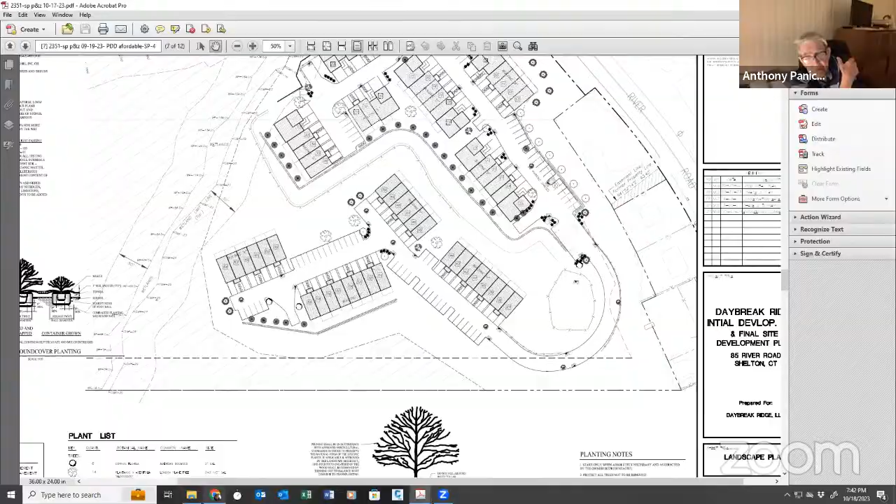Is there going to be any plantings on the slope? Any of those steps will not have plantings? No, just because, as you see here, it's not going to be favorable. The only way to do that is if we created planter pockets, and I think with planter pockets, the rock is going to stand up. It's not going to drop. It's not going to fracture or anything. But if you put a planter pocket in, whatever's in that planter pocket could come down the slope.

And I don't think that's a good idea. The only thing that we could do is put some spreading yews on it and see if they grow, if there's enough soil. Because I don't think there's enough soil on here to grow anything. But spreading yew might grow its way down the face, kind of similar to what you see here. But without any vegetation between the pavement and the non-vegetative cuts and fills? No, there's no pavement right up to the cuts.

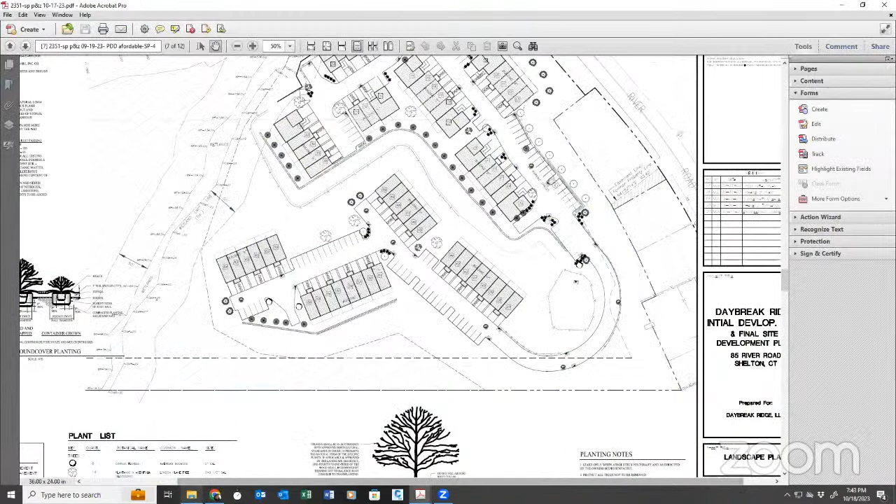I mean, so here, let me pull up a rendering to illustrate that even better. So you're going to have green space. Well, where is it? It's not loading my green space. It's making me into a liar. It's green. Oh, there it goes.

Okay. So there's going to be the units and a green space, the fence, and then this white area is just the rock face, the cut face between phase 1 and 2. So there's going to be opportunity to plant anywhere between where you have paved and building, and you have more than 25, 30 feet to that fence from behind these units. Similarly, you have that down here below. In fact, you have more space on top than you do below.

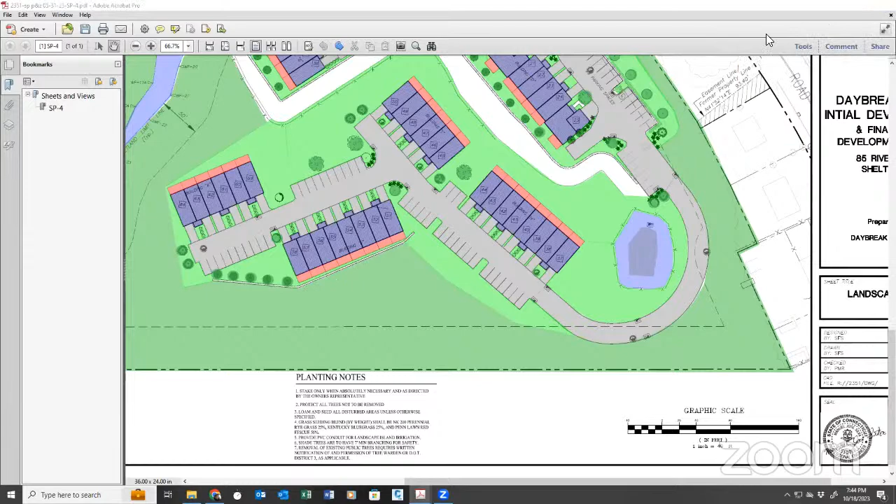Well, also behind building number, I can't read the numbers. I think they're letters. The one where you changed the back slope, you moved the back slope back. Yep. That's here. So this rendering doesn't show that. See, that now has a rock face in there, right? So this is the original. I didn't update the rendering. And now, yes, it's going to be 25 feet and then it'll be the grade coming up.

So there's a flat area of 25 feet behind these units. Okay, there's no wall in there then. No. So it's 25 feet of flat and then it's going to go up. There's a strip of rock cut that has no vegetation. Correct. So your green map is not quite accurate. No, it is, I mean, behind it. Yeah, I didn't show that strip missing behind on the upper, this 40-foot upper cut. That whole upper area has its own unvegetated strip. Correct. Similarly to this one here.

We're not going to have anything planted on the rock face, no. And everywhere you've shown contours are cleared areas that will remain cleared areas. In this portion, yes.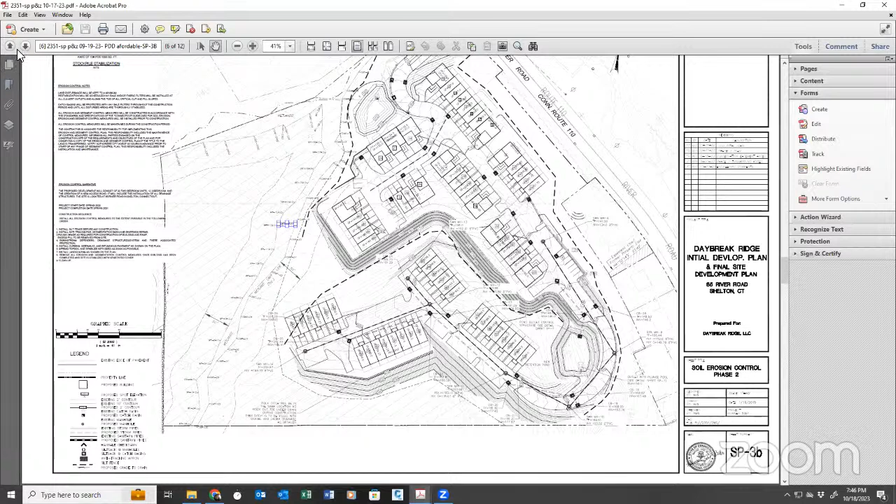Can I make a suggestion, Mr. Silva? Might talk with the applicant about it, but there is a place on Vancouver Island in Canada that we had the occasion to visit about 4 years ago. It's the site of a former cement quarry, and it's Butchart Gardens. This was developed about the turn of the century. The husband was the president of the concrete quarry, and his wife, after seeing this big hole in the ground with rock ledges, proposed to her husband that they turn that into display gardens.

And she was known for going down on something like a child's swing, and went down the side of the quarry and plopped in plants wherever the crevices were. Okay. So that can be done, something there that could be worthwhile.

Yeah, because as you guys have seen, I don't know if anybody's been out there, but it does create some flat areas as we do the benching, similar to what you see here in the detail. We could plant stuff along the benches. But how these appear and where they appear is random, depending on how the rock is broken. But yeah, we can definitely incorporate plantings on flat areas on the face. That'd be a good idea.

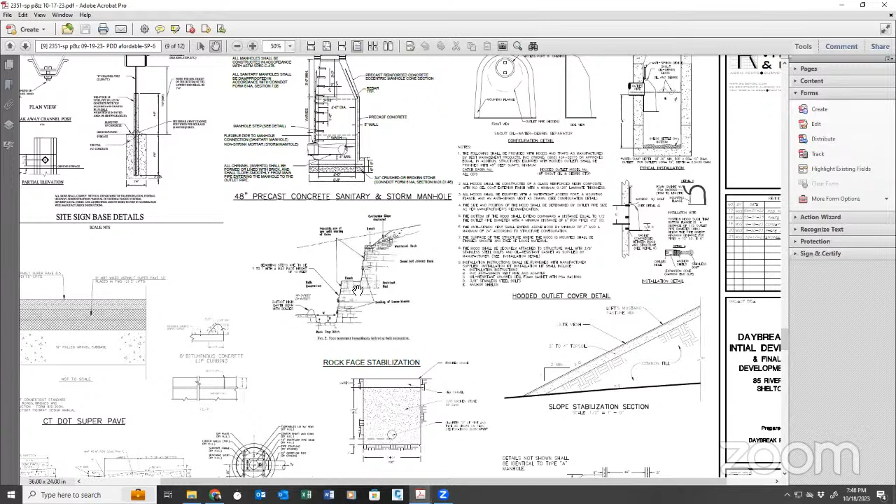Well, look into it. Commissioner Amato had mentioned that maybe the root systems might work their way in and break the rock and create more of a problem. So it was just a concept that I saw. Yep, I'll definitely note it. I wrote down the park, so I'll research it. Thank you.

It's supposed to be, I think, a 2-hour tour on your own. Or for 6? Really? It was amazing. So what else do you have for us, Mr. Silva? I think that was the last thing I had to talk about. So if there's any other questions, I'll be happy to answer them.

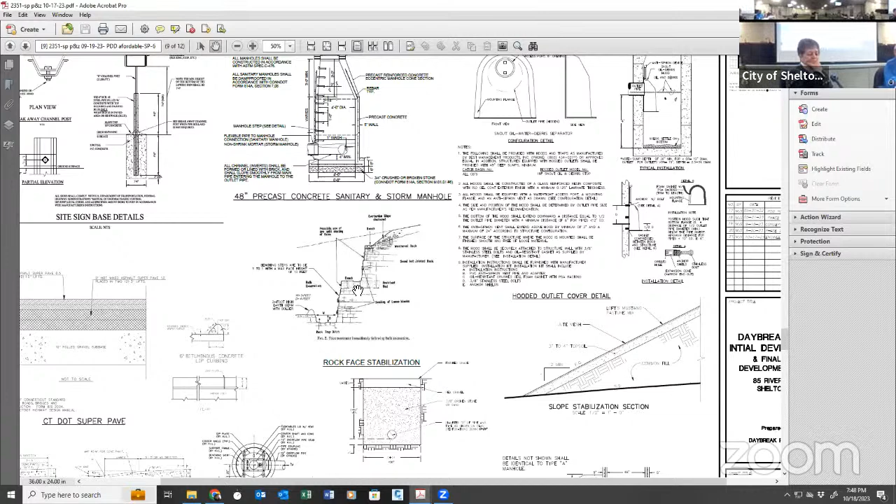Mr. Panico? My most serious concern is that you've got a development that keeps growing and the majority of it is on a dead end situation. Once you go past that first intersection, where at one time we talked about extending the island up to that intersection, for some reason it never got built that way. But beyond that point, it's all dead end. So you got 1, 2, 3, 4, 5, 6, 7 buildings on a dead end system.

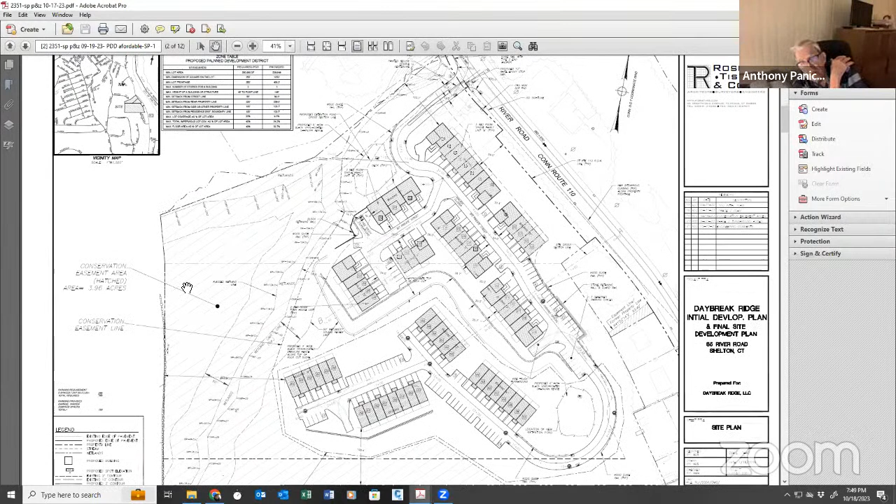And my concern is the dead end system in combination with some rather steep grades and a lot of heavy grading. It causes me some concern. Okay. Attorney, excuse me, go ahead. One second. The 180 degree, 170 degree reverse curve, is that where the 10% slope starts? So it goes up 10%, flattens out to 5 in front of all of the buildings. In other words, the rest of the road is 5%.

Yeah. So it starts only from that. It's only 10% around the hook, right? Where these parking spaces end. And then where these parking spaces and this driveway starts, that's the 10% section. Okay. I couldn't have any parking or driveways along a 10% area. I wouldn't do that. Right.

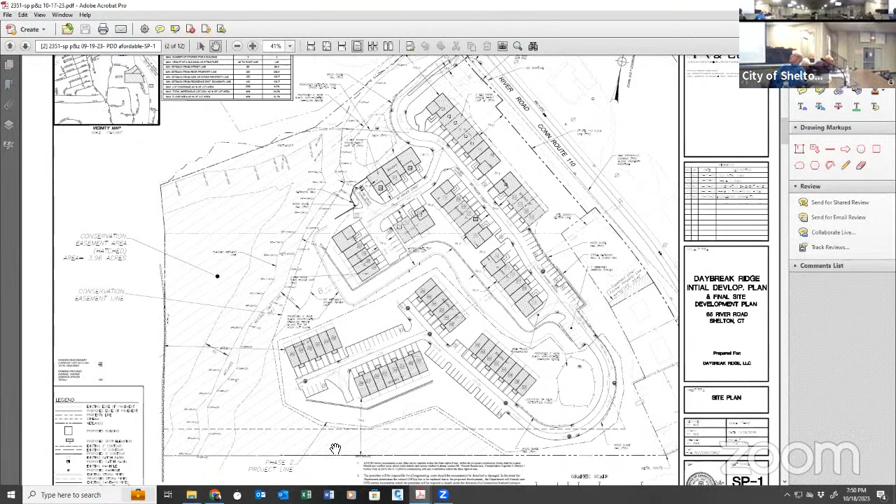Commissioner Donato, I just had a question. At the very end there, the green, Mr. Panico pointed out that the green wasn't accurate the way it portrayed, right back there. So there's gonna be a wall there? No, it's rock ledge. It's going to be stepped rock, and there's going to be woods behind here. So there's a conservation easement that's being placed here, and this is all going to be wooded in perpetuity due to the conservation easement, and that's going to be about 4 acres of land up here.

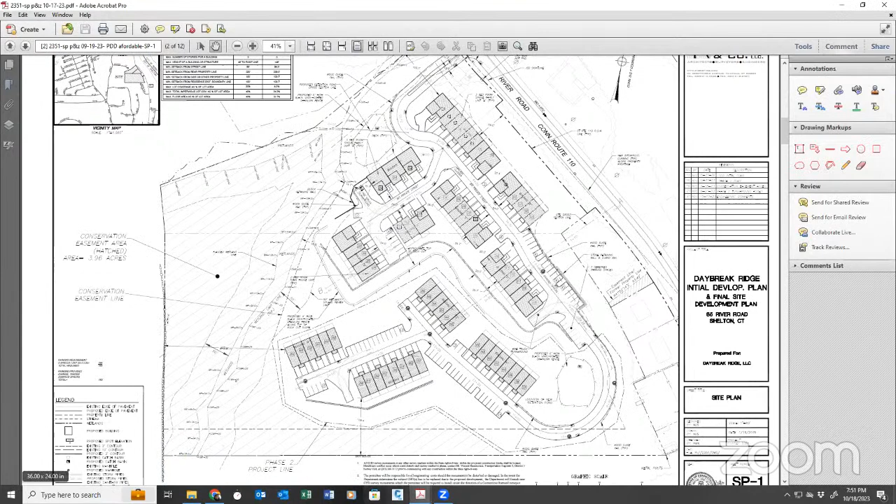Could you pull up that page also? It's highly defined in color. Sure. I think also the problem with the error was in the color rendering, and Mr. Silva said he had not updated the area behind the building after pushing the rock cut back. Correct, it was related to the color rendering, not the site plans. Do you have the sheet, Mr. Silva, SP-0? It's a location site plan?

Yep. Because that shows the satellite view of the site, the conservation easement notated, and where all the trees are. Right. Yeah, I'll show that right now. Of course, just at the end of the hearing, Adobe wants to freeze on me. I just fixed it. It does this to me every time.

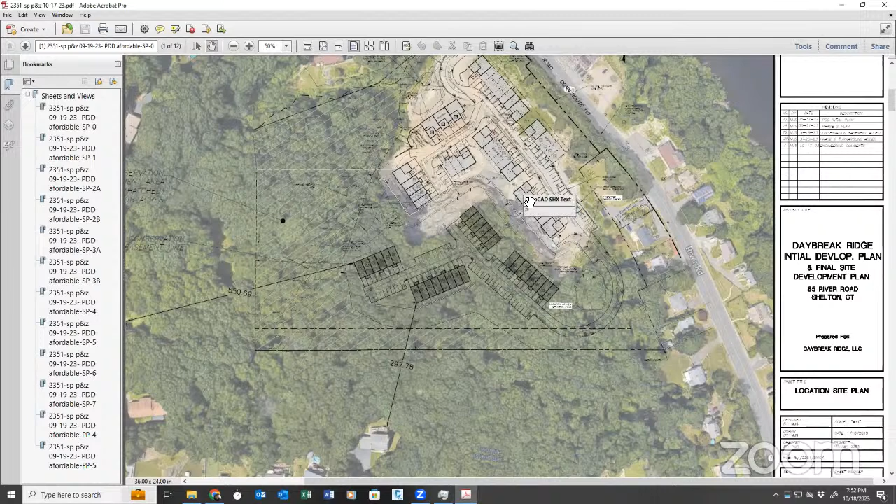So as you can see here, this is the phase 1 development in that aerial photo, and then as you come up, you're going to see that the rock cut areas are open right now, the faces, but these are laid back, benched back. That's why you see it that way. And then that's actually going to occur here, and it'll be just wooded areas around here, and you'll see there's quite a bit of woods between us and the neighbors, and that's how it's going to remain.

Do you have the ability to change to a red pointer and outline the conservation easement? Yeah, sure, I can do that. Absolutely. So the conservation easement is going to be here. This is where our property is. And this is going to be about 4 acres. Let's see, get this right. It's going to come to here.

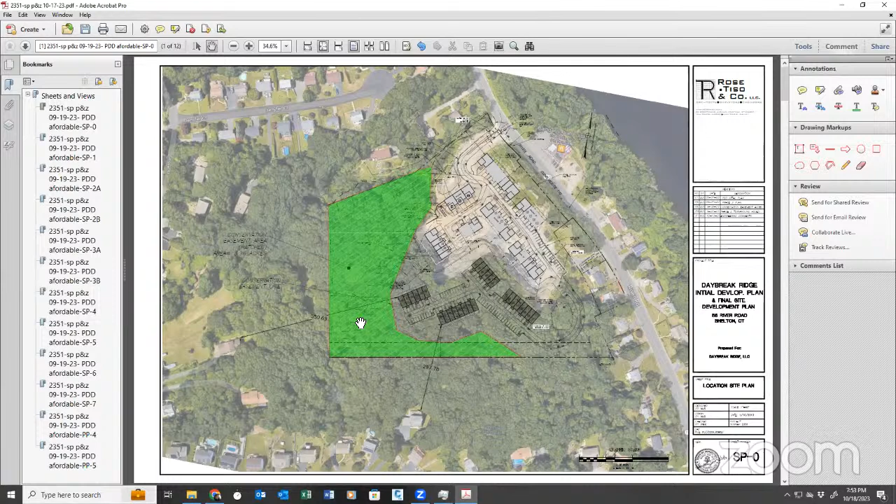I don't know if, can you see that red? Yes. So that's the conservation easement, 4 acres that's going to be given away, or not given away, but it's going to be a conservation easement for no future development. Are there going to be any fences up there, or it's just? There will be a fence at the top of this cut here, that 40-foot or 30-foot drop. So we'll have a fence up there just for fall protection, in case someone comes out through the woods running and not looking where they're going.

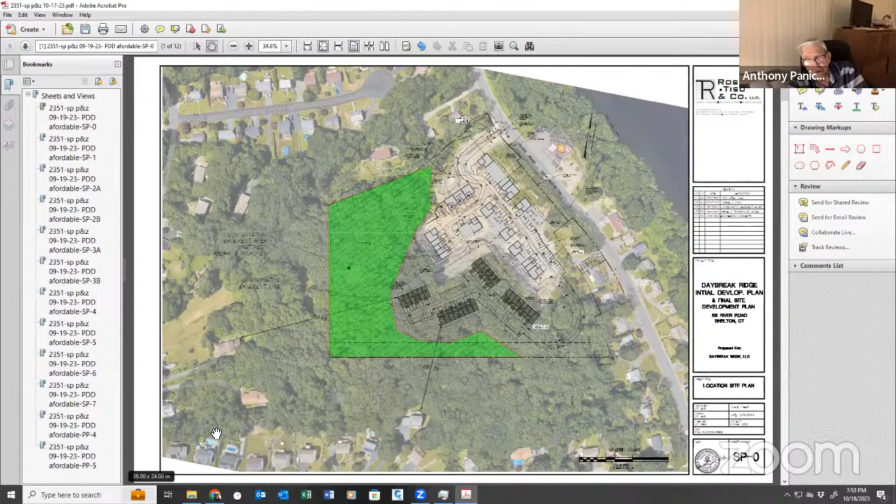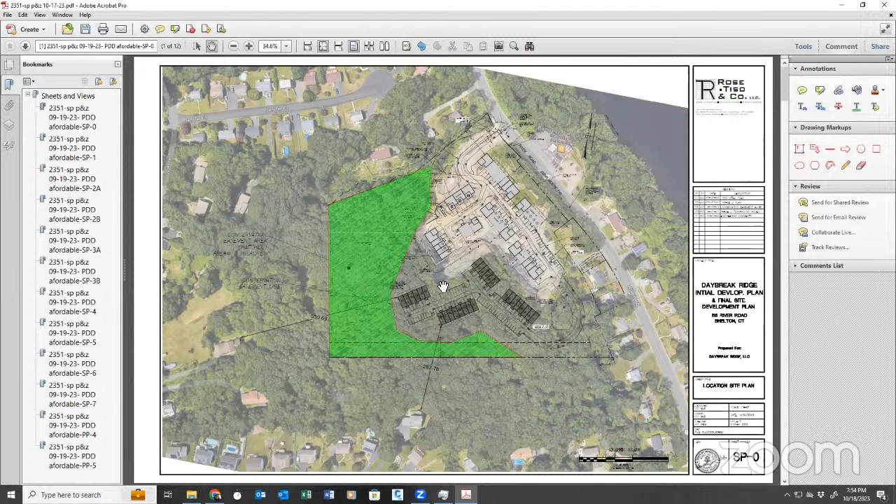And by the same token, then, the natural vegetation is only in the conservation area? Yeah. That's what I meant. Any other area will be man-made landscaping. That makes it clear. Okay. Thank you. Okay, anything else, Mr. Panico? No. Okay, anything else from any of the commissioners? Attorney Thomas, anything before I open it up to the public? No, I think we've addressed all the concerns and questions.

Very good. I'll open it to the public, and I'll just ask for the record, is there anyone in the auditorium who's an elected official that would like to address the commission on this particular application? I don't see anybody indicating that. And if there's anybody participating via Zoom or by phone, you need to use Zoom's raise your hand feature or dial *9 to identify yourself if you're an elected official. Okay, there's no one doing so.

So we're going to just ask anybody in the auditorium that's a non-elected official if they want to address the commission. Please indicate that. I see nothing. And members of the public who are participating remotely, use Zoom's raise your hand feature or dial *9. Okay, and there's nothing according to Ms. Castro. So no comments that need to be responded to. Any further questions from the commission for the applicant? Okay, nothing. Commissioner Lascos, you're good? No comment. Thank you, Mr. Panico. Any final comments or questions?

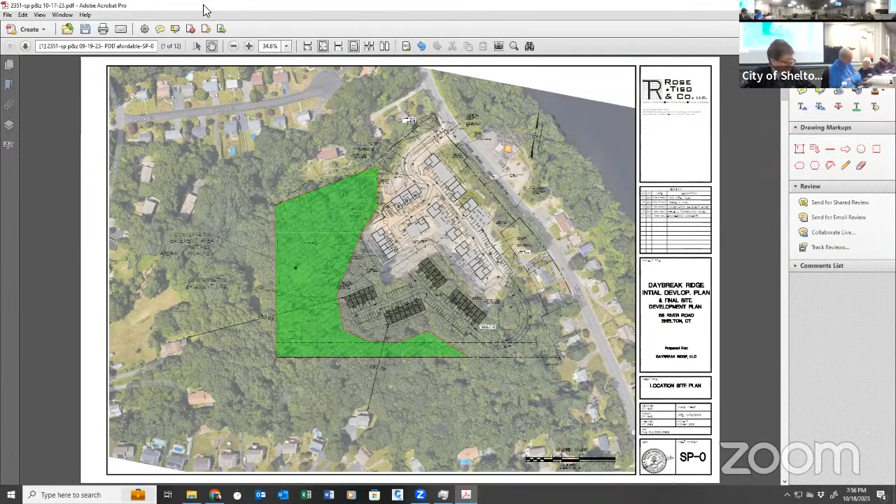No. Okay, so does the commission wish to continue or close the public hearing? We do have 2 regular members absent tonight. They can watch the Zoom or the YouTube replay. So yeah, we won't keep it open for that reason, because there wouldn't be any material coming to us. Right. What's the difference between this one and Fountain Square? We closed that also. So you're talking about closing. Favorable. I think we can close it. All right, very good. So is there a commissioner that would like to make a motion to that regard?

I'll make a motion to close. Okay, Commissioner Kelly's made a motion to close. I'll second it. Thank you, Commissioner Lascos. On a motion to close the public hearing made by Commissioner Kelly, and seconded by Commissioner Lascos, I'll do a roll call. Commissioner Donato? Yay. Commissioner Amato? Aye. Commissioner Lascos? Aye. Commissioner Kelly? Aye. And chair votes aye. Motion to close has been approved by a vote of 5-0. Thank you very much, Commission.

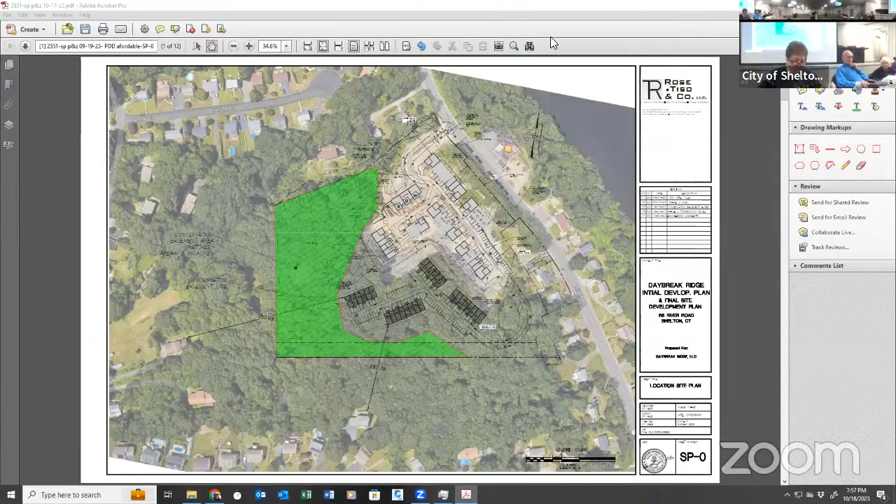Thank you very much. Okay, good night. So this item will be on the agenda of an upcoming meeting for discussion by the commission. Final item on the agenda this evening is discussion of holding only remote meetings on Zoom through the winter months, which is the holiday season as well. Would you excuse me from the balance? Yes, you go right ahead, Mr. Panico. Thank you. So the record could reflect that Mr. Panico left the meeting at 7:57 PM.

So is there any commissioner that wants to comment on this particular suggestion to go back to remote meetings? For what, November, December, January, February? Yeah, December, January, February. Okay, I agree. So we're talking about December, January, and February? February starts snowy. Yeah, so, February. Yeah, I think it makes sense. We wouldn't have to cancel meetings or worry about canceling them. Right. Absolutely. So, all right, is there a motion to go to entirely remote meetings for the months of December, January, and February from somebody?

Yeah, I'll make that motion. Okay, there's a motion from Commissioner Kelly on that. Is there a second? I'll second. And Commissioner Amato has seconded. So on that motion to go to remote meetings for the months of December, January, and February, made by Commissioner Kelly, seconded by Commissioner Amato, I'll do a roll call. Commissioner Lascos, aye. Commissioner Amato, aye. Commissioner Donato, aye. Commissioner Kelly, aye. And chair votes aye. Motion has passed by a vote of 5-0.